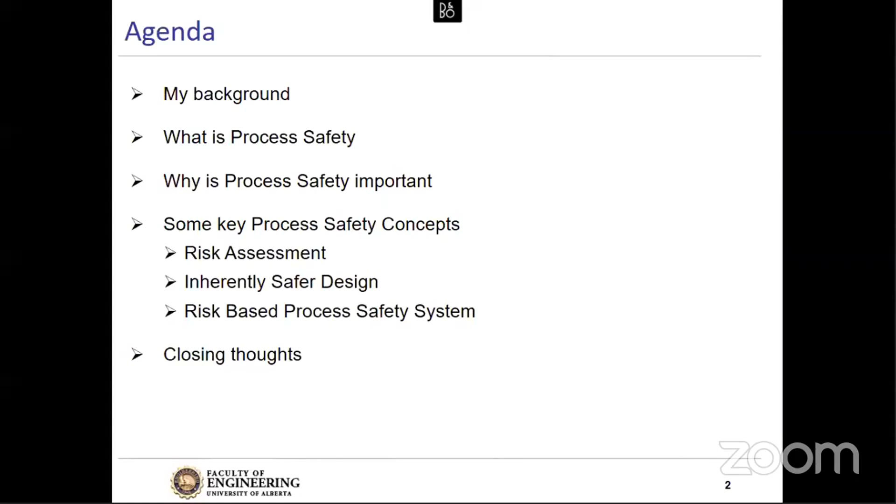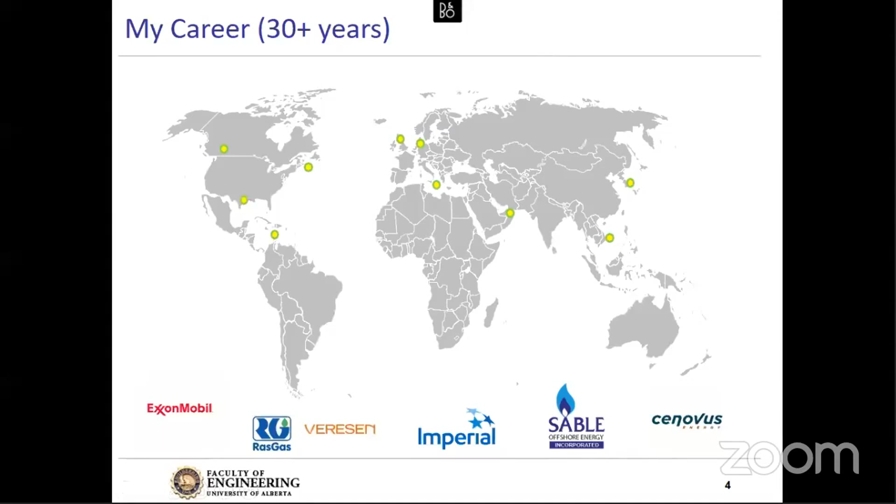When I look back at my career, I'll share with you some highlights over 30 years of places around the world, as shown by some of these yellow dots, that I had the very good fortune of working with through some of the companies that are listed down here.

When I look at my career, this slide here is a little bit busy, but I will take a few minutes to walk you through it, because it's very important to understand that when you're sitting there as an engineer getting ready to graduate in your senior year, you think you will have a very set path in your career. And I'm very confident that there will be many opportunities that come across to you that will take you in different directions and some very interesting areas.

And when you look back, hopefully after 30 years like I do, you realize I was very fortunate to work with some great organizations and meet some wonderful people along the way.

So if I look on the left-hand side over here, I started my career with the company Mobil Canada here in Western Canada. I worked for several years, and I had a degree in petroleum engineering. Then I went back to graduate school in '92, '93, and I went into environmental engineering in a master's. I did some environmental engineering work in British Columbia, a province next door to us on the Pacific.

Then I rejoined Mobil Oil, and I had a number of assignments with them working out of Calgary. And then from there, I went to a project off Eastern Canada, Sable Offshore Energy. This is a picture of it. I'll share some more thoughts on that.

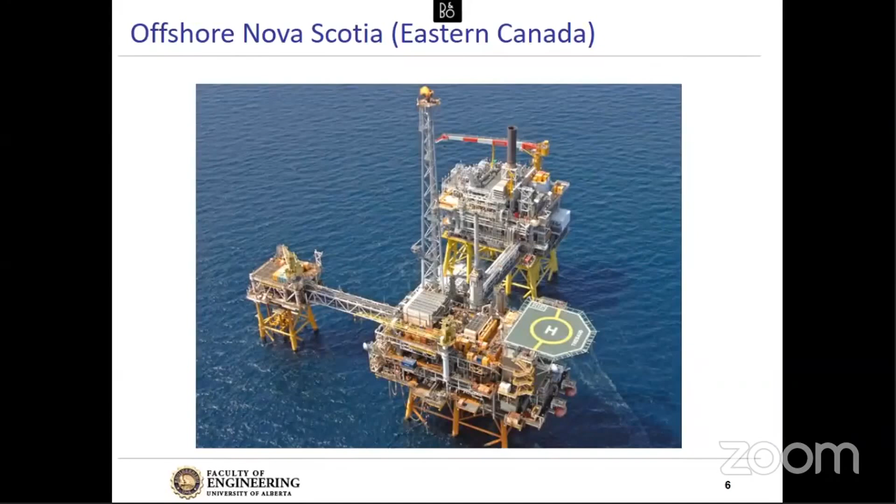A couple things I would mention here is that this is a great looking day offshore. You don't see much whiteness in the ocean. And it's a very compact environment. So as you can tell here, the way these platforms are built, you build upwards. And these platforms bring a lot of risk due to their small size, their remote location, and the large volume of hydrocarbons that go through these platforms every day. So very interesting for risk management.

I mentioned I worked in the state of Qatar on liquefied natural gas, or LNG. This was a project where we had some 30,000 people building our plants, and we were expanding quite rapidly to develop LNG to supply the Far East, Korea, Japan, and China. At the time, we had a footprint of 1.6 kilometers by 1 kilometer. We ended up building that whole part of land in terms of the size of our plant. It was a massive, massive project.

I had the good fortune of working with people from 52 different nationalities. Just a wonderful experience. And also a lot of risk as well. Taking natural gas and chilling it and making it cold to get it ready for shipment is very interesting, but also has significant process safety risk.

When I came back to Canada, I was involved in oil sands mining for several years, some major projects, which are large strip mines in northern Alberta, which have oil sand or thick mixture of almost like molasses and soil particles, and quite an engineering feat to be able to mine that bitumen, as it's called, and make that into a product that's usable.

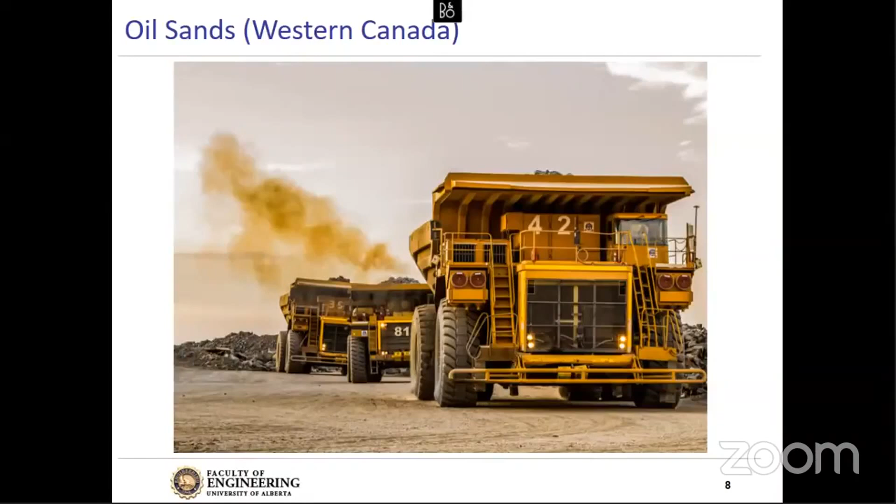Also in Western Canada, when we have too much overburden or soil layer.

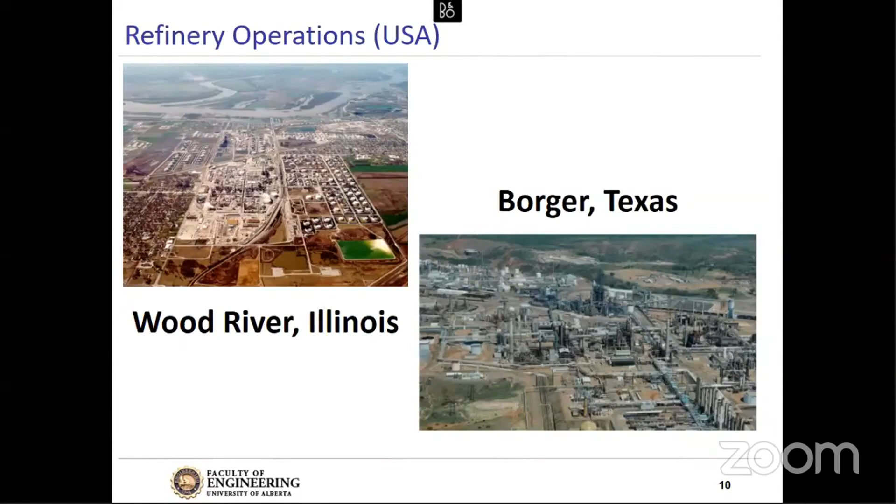And then next door to us in British Columbia, where we have a lot of rain at times of the year, we have, you can see here in black, this is what's called a run-of-river facility. It's like a dam that you inflate when you have high water volumes and you want to divert that water through a turbine, which would be in here, to create electricity. But it only works well when you have a lot of water discharging through rivers. Very interesting work as well.

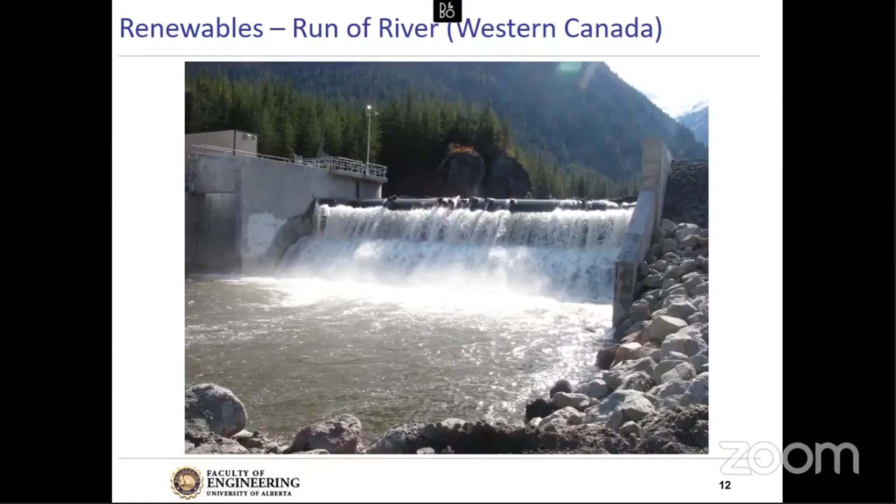So that was just an overview of some of the places and people I had the good fortune of working with over the years.

Let's talk about safety concerns and types of losses. When we think of safety, there are two broad types. The first, which most of us think about, is personal or occupational safety in terms of preventing injuries to people, like when you slip at work, cut your hand, or fall off a ladder. The second type is technical safety, which is preventing some unintended release of a form of energy. Process safety is a subset of technical safety.

Looking further at both categories in terms of type of loss incidents: personal safety tends to involve a worker, with examples like a slip, cut, or fall. It's usually due to something in the workplace, what we call a substandard practice or condition. When we look at the injuries, it's typically one, maybe two or three people.

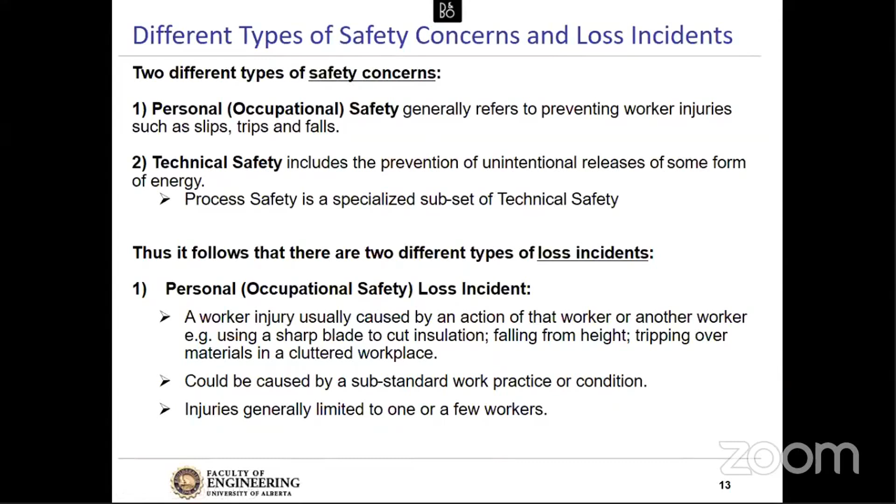We consider technical safety as really losing containment. Something that has energy is usually contained or maintained, and we've lost that, resulting in an unintentional release. Often it's a chemical or something hazardous, but it can also be a form of energy. What's interesting with technical incidents is that the likelihood of them happening is very low, but when they do happen, the consequences can be catastrophic. The injuries can involve many people, a significant impact on the environment, loss of an operation or asset, negative publicity in newspapers and television, and your business may never recover.

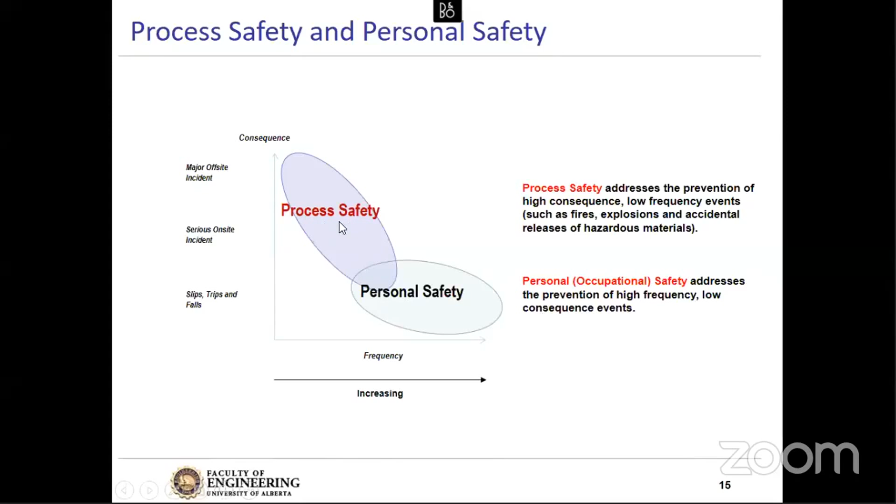Some key differences as noted here: they're not the same, as I explained. If we look at personal versus process safety, personal safety tends to be very focused on work interactions, rules and equipment, and training of people, so there's a lot of individual control over prevention. Process safety is much broader, a more systematic approach, with typically little control at the individual level. Examples we've talked about are falls, slips, maybe electrocution, some minor injuries. Here, the incidents are explosions, fires, and releases, which are much more significant. The safeguards for personal safety are things like work permits, PPE—if you think of coronavirus, a mask is PPE—guardrails, that sort of thing. For process safety, the safeguards include both design, which is a big part of our job as engineers, and also ongoing operations.

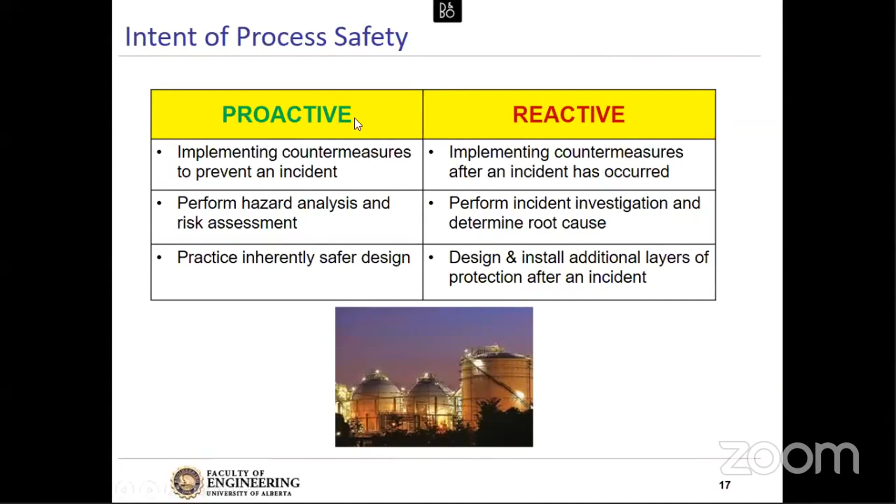When we think further about process safety, it is meant to be both proactive and reactive. When we think of being proactive, what are the countermeasures we put in place to prevent something bad from happening? We perform hazard analysis and risk assessments, and we practice this concept of inherently safer design, which we'll talk about. On the reactive side, we also have to have countermeasures after something bad has happened to try to minimize further consequences. We take a deep dive on our incidents to truly understand why they happened, and we look at designing and installing layers of protection for after an incident. So you have to be looking at process safety through both a proactive and reactive lens.

So when we think back on process safety, a defining event happened over 35 years ago in the United Kingdom at Flixborough. There was a major explosion, and it involved cyclohexane, a very tragic incident that was preventable, but it had major losses.

After this incident, process safety got a lot more attention and focus in terms of industry, training, and regulations. That was 35 years ago. Let's think of BP Texas City, that some of you may have heard about. This happened just about 15 years ago, and this is an image from this incident, a tragic incident. So these incidents still continue to happen involving process safety, which is very terrible.

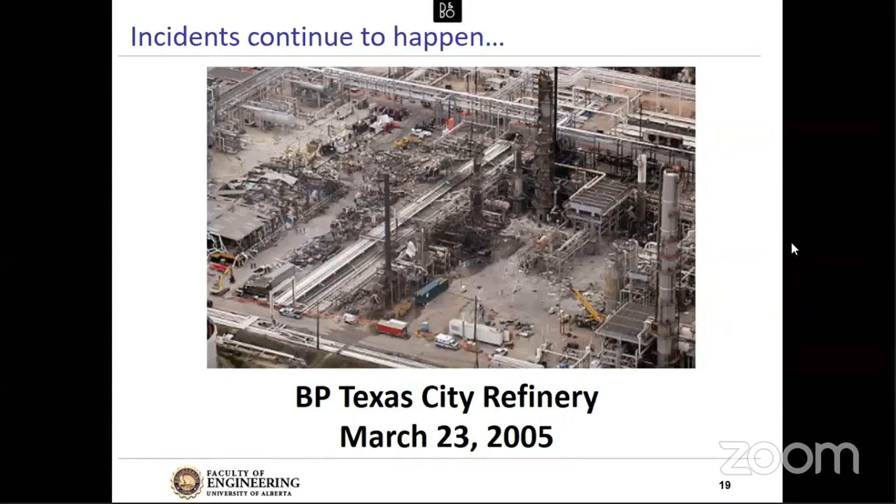So we say to ourselves, why are we not learning from these types of incidents? Why do they still occur? Why aren't things improving? Some things for us to consider, some questions.

Do you think sometimes that organizations spend way too much time on preventing slips, trips, and falls, but maybe not enough time thinking about those process safety type of situations? Do you have the right personnel, particularly your operations and maintenance personnel, involved in making decisions? They are experts in your business.

Another question, are you paying attention to what I call signals or indicators of something not being right and being proactive and using that information? This one, the second last one, is a real big item. Sometimes you'll hear people say, it doesn't happen at our site, it only happens at other places, right? Are we sharing and learning the lessons of others?

Or if you're at work, what does your senior leadership talk about the most? Are they talking about profits? Are they talking about layoffs and cuts and reductions? Are they talking about efficiency? And when they're talking about safety, are they talking about process safety in addition to personal or occupational safety? So let's explore this a little further.

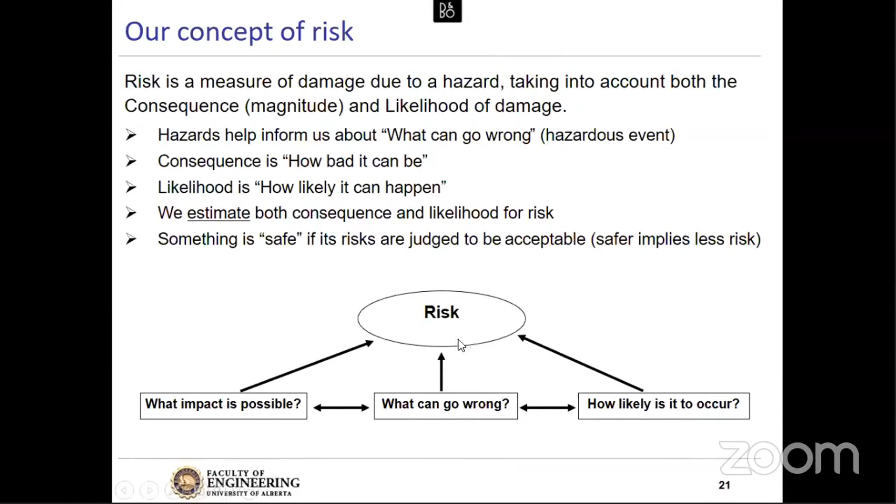We use both consequence and likelihood to estimate risk. So unlike other things we calculate in engineering, risk is more of an estimate. And we say to ourselves, if the risk is acceptable, something is safe. So this diagram at the bottom captures these concepts in terms of what can go wrong, how likely it will occur, and what impact it could be. These areas inform our understanding of risk.

When we think of risk criteria, as I mentioned, process safety events have much more significant potential consequences, but their likelihood is very low. And we have to understand that everything we do, every activity, even things outside of work—driving a car, walking down the street and talking on a cell phone, skateboarding—all have a level of risk with those activities. And it's never entirely eliminated, and we end up with what we call a residual level of risk.

Companies and organizations put in place criteria for the risk with their activities, and they use these criteria to establish a risk matrix, which we'll talk about in a moment. A key thing is that when we believe we have an acceptable level of risk, that is the maximum amount of risk that we can accept. And if something bad happens, we can live with it.

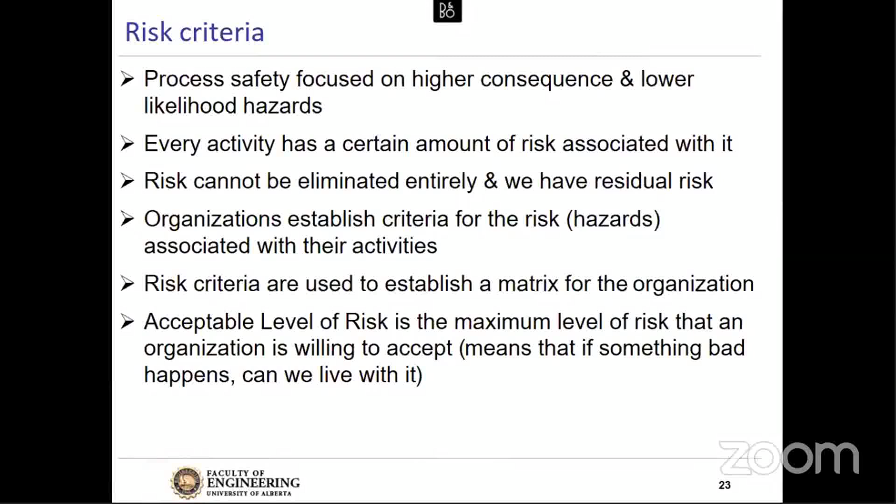So for us, when we think of process safety, we come back to fundamental questions. What are the hazards associated with our activities? How do we evaluate the hazards? What can go wrong and how?

Then we think of risk analysis with several questions. How bad can it be? How often can it happen? And when we know consequence and likelihood, we're able to estimate the risk as a combination of them. And then, how do we control and manage this?

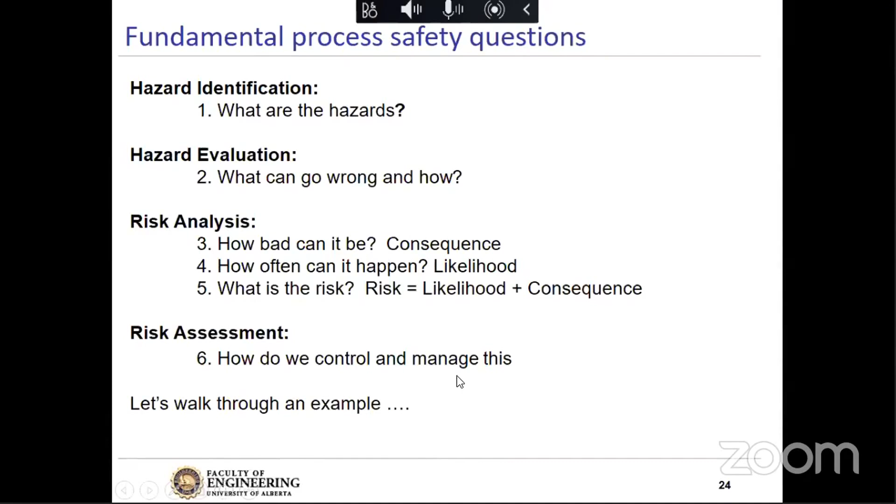So let's talk about an example that we're all familiar with. Imagine you're going to a service station to fill up your vehicle. And when we look at this through risk, how do we approach this situation? What questions should we ask to fill our gas tank safely? I'm sure many of you have done this many times and probably do it in a way that you're not even thinking of the risk.

So when we think of our questions, those fundamental questions of gassing up a vehicle: the hazards, what can go wrong and how bad can it be, how often can it happen, what is the risk, and how can it be controlled and managed.

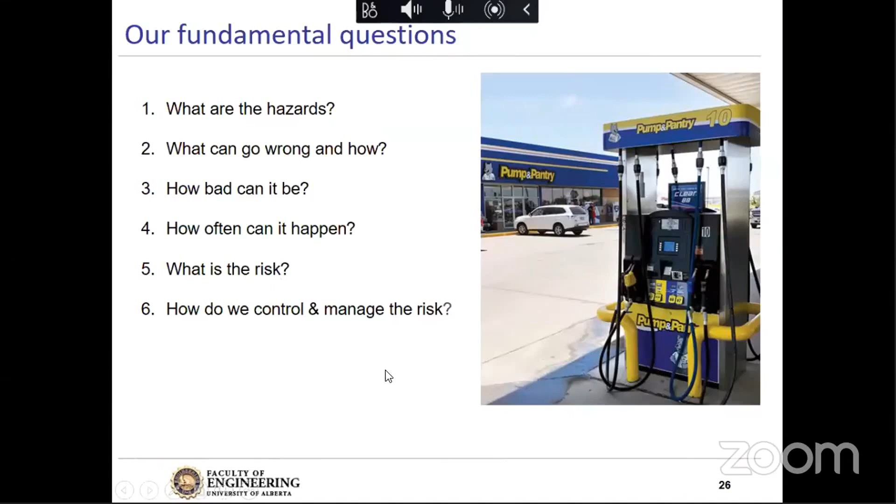For us, when we think of chemical plants, there are three main sources. The chemicals themselves, the properties, just like gasoline - is it toxic? Is it flammable? Will it react with other things? The equipment we're using, because we're worried about containment, so could we have potential leaks, equipment failing to operate outside of limits for operation, so several questions. And our procedures, how we start and stop if it's not correct. What if we have an emergency? What if we start the wrong equipment?

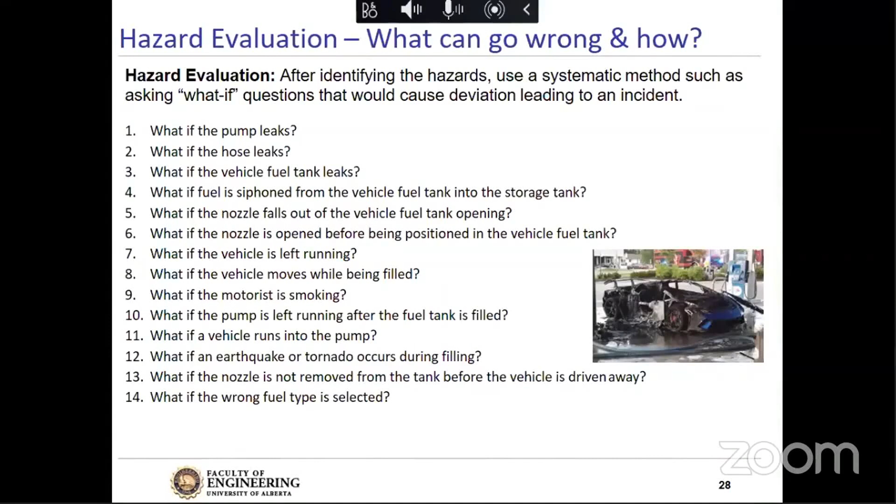How often can it happen? We look at the likelihood in terms of the expected probability or frequency of what we call an initiating event, which is the first event leading to an incident. For us, we often use frequency. Here's an example of someone says a pump could fail once in 10 years. That would translate into a frequency of 0.1 failures per year.

And here is the example of our frequency portion of our risk matrix. Improbable, practically impossible, to very frequent up here, likely to occur repeatedly.

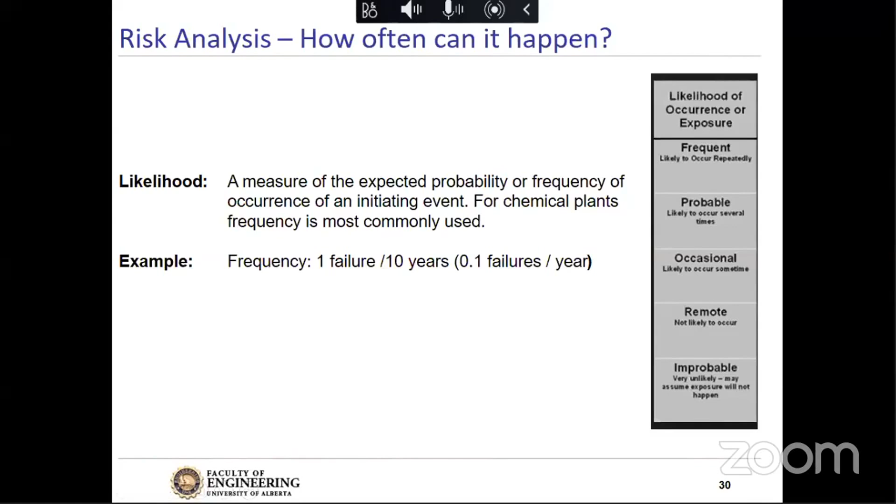So after we've assessed the risk, how do we control and manage it? Here is a model that's used frequently, called the Swiss cheese model. Some important things on this model: just like slices of Swiss cheese, which are depicted here, there are holes in the Swiss cheese.

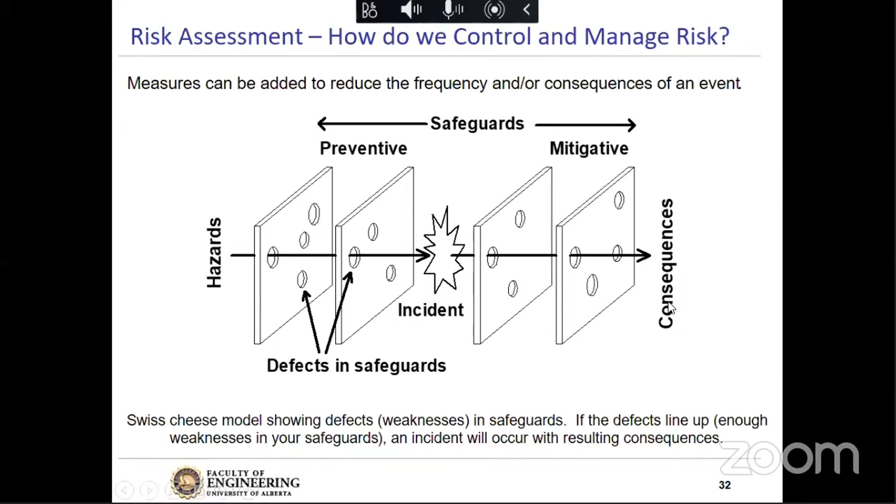Let's go back to our gasoline station. What are some of the safeguards? Maybe it has full service, so you don't have to leave your vehicle. There's somebody that's trained and competent in gassing up your vehicle.

Maybe there's barriers in front of the gas pumps in case the vehicle loses control, which helps you from hitting that gas pump. You have a fire suppression system, typically with foam. You've probably seen emergency stop buttons, both at the pump and remote at the attendant's desk.

Warning signs and instructions. So this is a list of many safeguards that are present at gasoline stations, some of them that we don't even think about when we're there, to help reduce the level of risk to an acceptable level for filling our vehicles with gasoline.

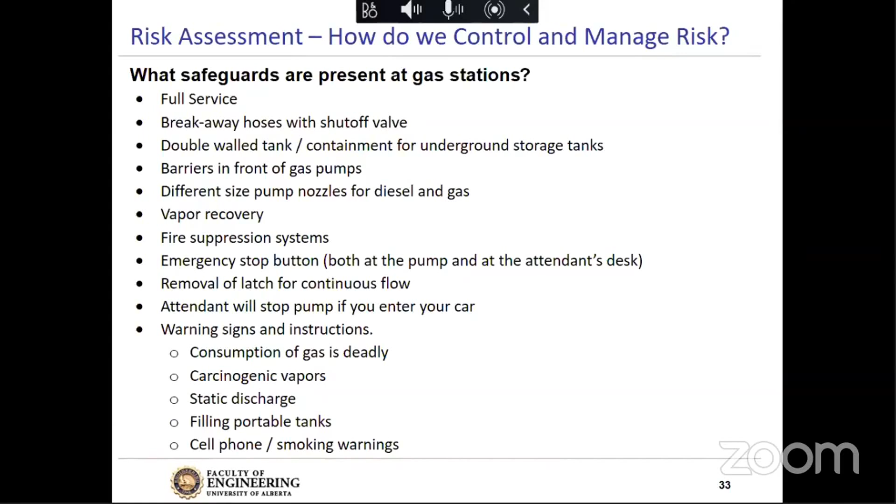So we've talked about a simple example, common, that we've all seen. Let's reflect on a key concept called inherently safer design. It basically means it's an engineering approach or a mindset to have safety built in or risk built out. It came out of the chemical industry in the 1980s in particular.

The Center for Chemical Process Safety provides us with this definition: it's a way of thinking about the design of chemical processes and plants that focuses on the elimination or reduction of hazards rather than on their management and control.

For us, inherently safer design happens very early when we look at building a facility. That is much more effective than trying to incorporate this concept after a facility has been built. Unfortunately, this is not always the case. As engineers, we're trained to be designers, but often we think bigger is better.

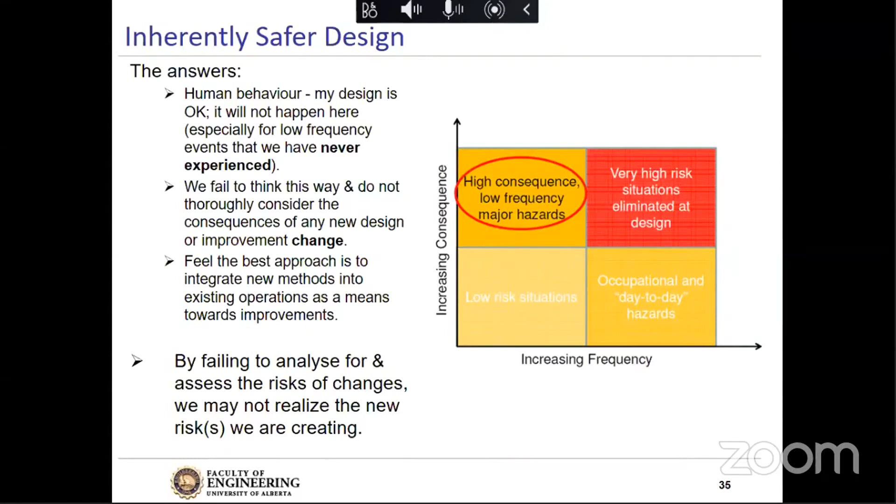So when we think of inherently safer design, there are four main strategies that approach this mindset of inherently safer, and I'll talk about each of these with an example here in a moment. From an introduction, the first one is to eliminate or minimize. This means to use small quantities, particularly of hazardous materials or energy sources, or to reduce the equipment in terms of temperature and pressure.

A great example is, we recall this earlier this year, there was a terrible explosion in Beirut that involved ammonium nitrate. A very large volume of ammonium nitrate was stored in the port of Beirut, which led to an explosion. If that volume was much smaller, the incident, while it may still have occurred, would have had a much less severe impact.

The second one is to substitute or replace a hazardous chemical or material with something less hazardous. The third area is to moderate, to reduce the hazards by maybe diluting or using a refrigeration type of process. And the fourth one is simplify, particularly in areas where you want to reduce the risk of human error.

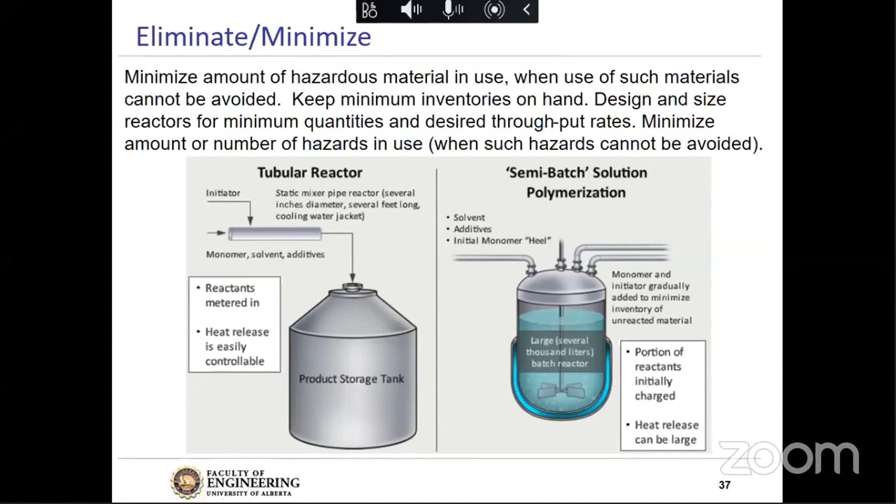One that we're very familiar with when it comes to substitution is paint. Many years ago, a solvent-based paint was very common for a number of reasons. Now we use much more water-based paint. Much better for the environment, for our health in terms of toxicity, lower odor, and also for fires. So a common example that we see is with paint.

Moderating, I mentioned trying to use equipment at less severe conditions, particularly temperature and pressure, or use hazardous materials in a least hazardous form.

This example here shows us an ammonia concentration modeling going from 0 to 20,000 parts per million, and a reaction distance for a leak, for a failure. This is from some consequence modeling for a small hole release, 5 centimeters, and the difference between using anhydrous ammonia and 28% aqueous ammonia. So we've moderated the type of ammonia here, and you can see, if you look at 10,000 parts per million as an example, if you had a release, the impact distance is much different between the aqueous ammonia and the anhydrous ammonia.

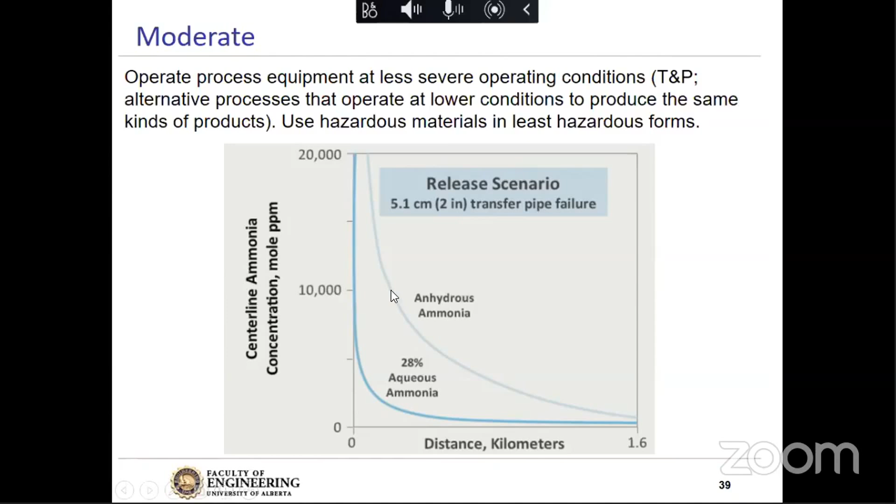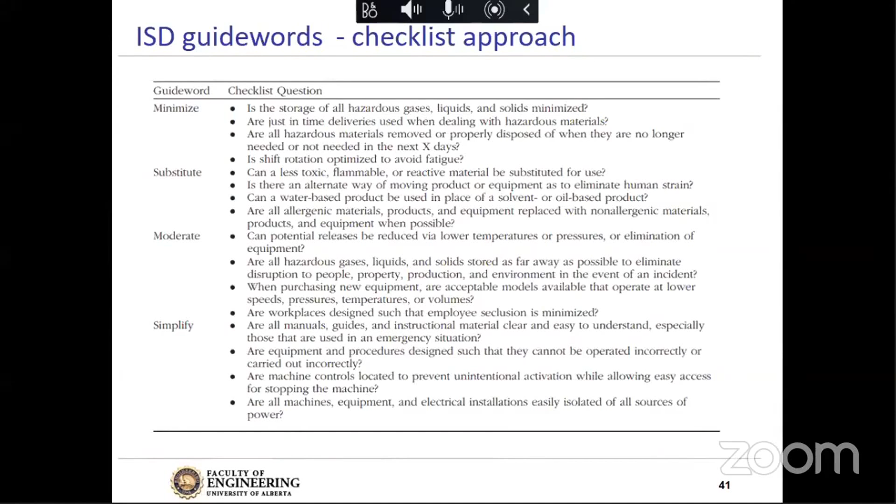So this brings us to the topic of risk-based process safety. And what we mean by this is that organizations have moved towards a very holistic, systematic approach to maintain their integrity of what they operate. And process safety is very much about being proactive and involving these principles, which I'll explain through a model here shortly.

A key thing for us is that the residual level of risk is never zero. You never get risk to zero. You get it to a level that's acceptable, as I mentioned.

So when we talk about a risk-based process safety framework, there are 3 things to consider. The first thing is this idea of what people call a management system. And what we mean by a management system is where you structure and document all your practices, procedures related to, in our case, process safety management.

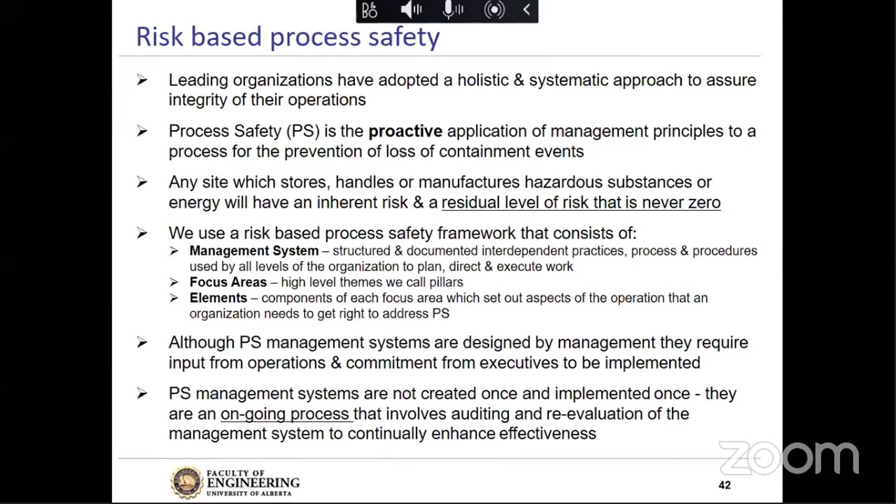So these 4 pillars become your foundation. And then we have these elements that are associated with each of the pillars. I'll spend some time talking through each of these to help give you a better idea of what they mean.

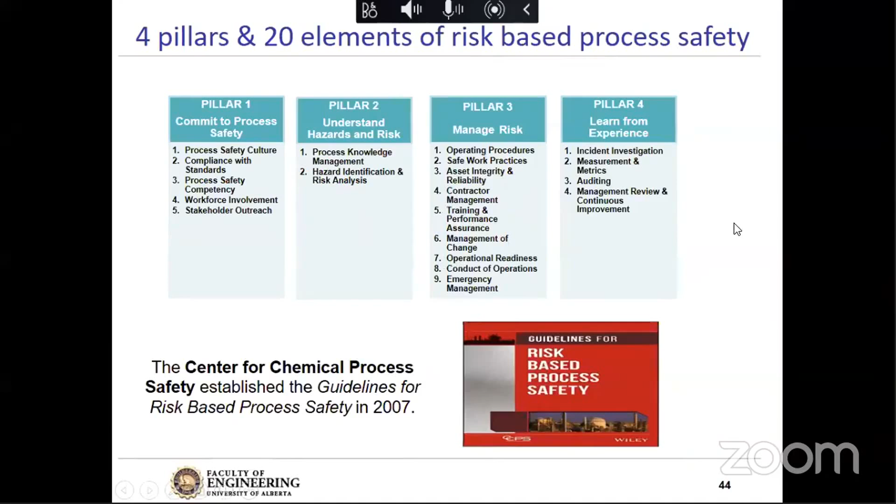So let's talk about pillar 1 first. Commit to process safety. Element 1 is titled Process Safety Culture.

What do we mean by this thing called culture? It's how we do things around here, what we expect, or how we behave when no one is watching. Why do we have this? Because when we've looked at terrible incidents, there has been a weakness in the culture of the organization.

And some key features to make sure you have a good safety culture are to particularly maintain a sense of vulnerability. Very important to make sure you're not overly confident, that you feel vulnerable. Making sure people are empowered. Use your expertise. Make sure there's open and effective communications. An environment of trust.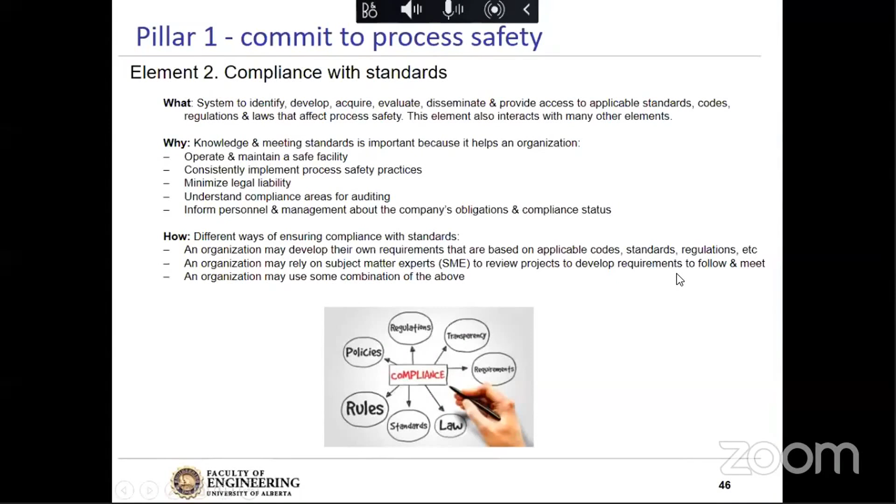Our next element, number 3, under commit to process safety, is process safety competence. What we mean here is a combination of process safety knowledge, understanding, and experience within the organization. It's important because it's harder to measure than other areas, and we often have requirements in place for career advancement. We have to make sure people are continuously improving their knowledge and competency, as you will experience through your career, and making sure the correct information is provided and applied consistently. So competency is a very important element.

Element number 4 under pillar 1 in terms of commitment is workforce involvement. It means, how do we involve all our workers, particularly contractors? I mentioned to you the incident at Texas City, during a turnaround at the BP refinery. A large number of contractors were unfortunately killed in that incident. So we had to make sure all people on our work sites are involved in making decisions. It's important because those people who operate and maintain our facilities are usually most potentially exposed to the hazards of our operations, and they're usually the most knowledgeable about what's happening every day. There's really no set of rules for how we do this, but it's important to make sure people actively participate.

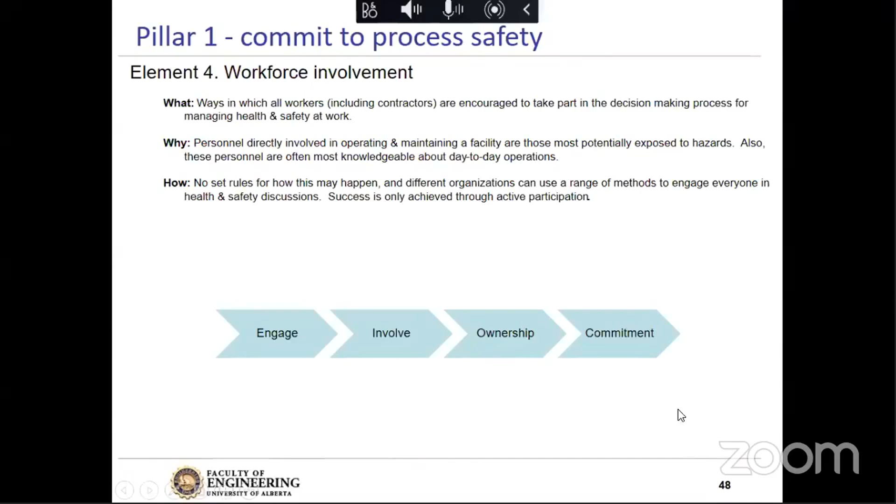Element 5 under pillar 1 is stakeholder outreach. This is a big topic today, particularly for us as engineers, understanding stakeholders and society's expectations of us to develop projects that are acceptable to the public. So for us, there are 3 key things.

Who are those individuals and groups that can be affected by our operation? Then we establish relationships with those groups, other companies, and inform people about what we do. There was a time in our business of chemical plants where you really didn't tell a lot of what went on in your organization to the public, and that has very much changed in terms of people's expectations.

This involves what I would call a coordinated approach by technical people such as ourselves, engineers, but also experts in communications and experts in legal requirements. Here's an example from Scottish Power: they call it their 5 golden rules of engagement. First, take the initiative to get to know your stakeholders. Then they say, listen—no, really listen. They go on to describe the other 3. Very important, not something taught as much traditionally in engineering, but stakeholder outreach will certainly be part of some of your jobs as you advance in your careers, I expect.

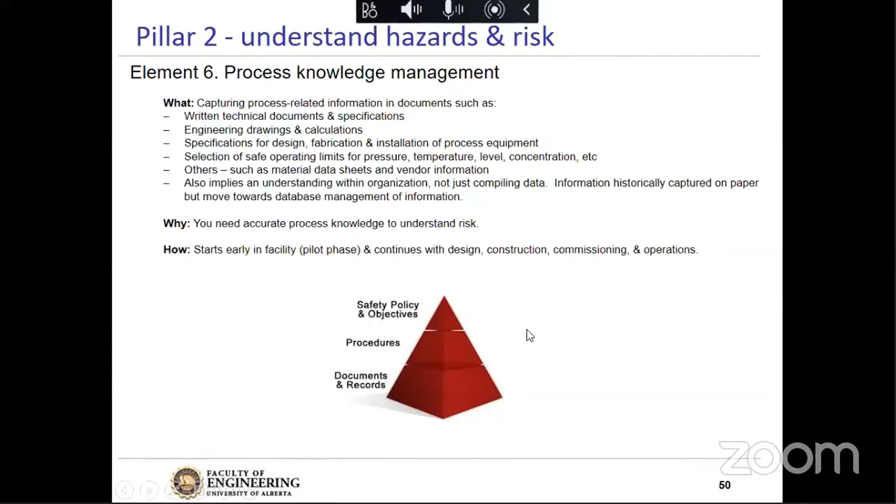Element number 7, hazard identification and risk analysis, sometimes called HIRA, is part of pillar 2. HIRA is a collective term that encompasses all activities involved with identifying hazards and risk evaluation to make sure the residual level of risk is acceptable. Some other words you may hear that mean the same thing are process hazards analysis, process hazards review, process safety review, etc.

So we do this to manage risk, but we first need to understand our hazards and then assess the risk. This comes back to the 3 questions we thought about with our example of putting gasoline into our vehicle: What can go wrong? How bad could it be? How often might it happen?

There's a number of tools we use for this. Some of you may have heard of hazard and operability study, or HAZOP. We mentioned the simple what-if, failure modes and effects analysis, and also layer of protection analysis. These are very technical, very much engineering.

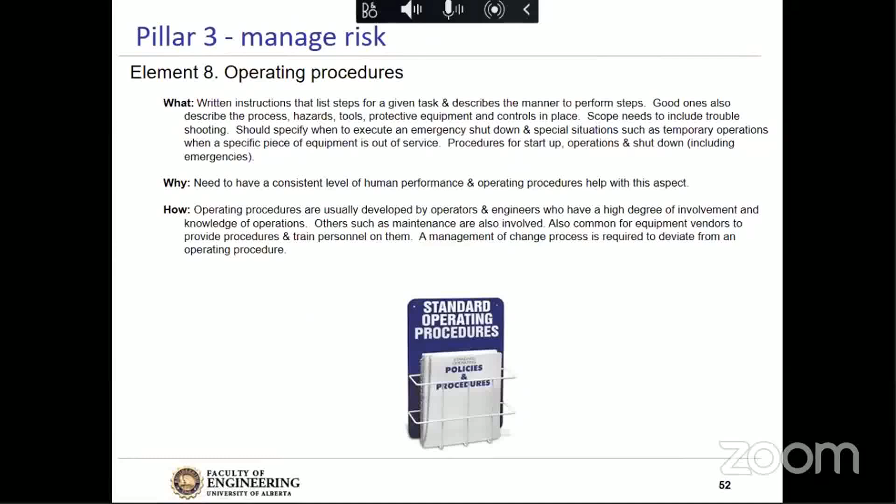Element number 9, safe work practices. Many of us are probably familiar with these if you've worked. This is the processes that we've put in place to help manage work. Some examples are lockout/tagout, hot work, line break, confined space entry.

Often our safe work practices are required by some sort of government regulation. And again, just like our operating procedures, we need to have consistency.

What's interesting is that safe work practices is one area where both process safety and occupational or personal safety overlap. If you recall the diagram we showed, the two bubbles overlap in one place, and this is an example of where that happens.

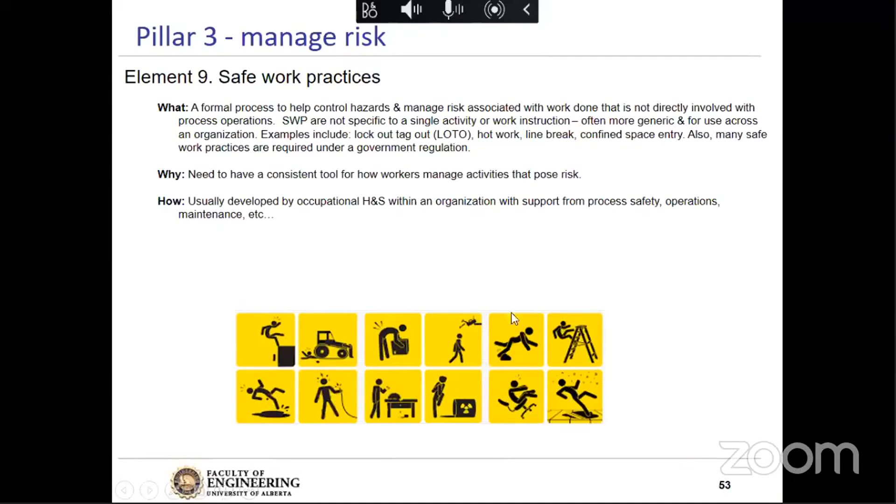Here are some common pictures of different safe work practices, reminders that you may see in the workplace - things from making sure you're using your office chair correctly, slips, trips, falls in terms of keeping a tidy workplace, making sure you're using your back correctly if you're lifting, and if you have things stored at height, that they're secured, etc. Many of us typically think of these because they're much more frequent or common.

Element number 10 under pillar 3 is asset integrity and reliability. What does this mean? We design equipment and we install it, and we need to make sure it's maintained fit for use until ultimately it's retired from service.

Good asset integrity and reliability involves inspecting equipment, testing it, preventative maintenance, and even predictive maintenance, repairs, and a good quality management program - making sure that our systems, particularly for us in process safety, key systems such as pressure relief devices, will work when needed.

It involves a team in terms of how we do it, including operators, maintenance, inspectors, and engineers, sometimes specialized engineers that are experts in, say, rotating equipment as an example. And in many places, regulations require a program for asset integrity and reliability.

Element number 11, contractor management. I mentioned before it's very important that we have our contractors engaged. Many workplaces in the chemical, petrochemical business involve contractors to help our regular employees, especially during maintenance outages. We hire contract organizations.

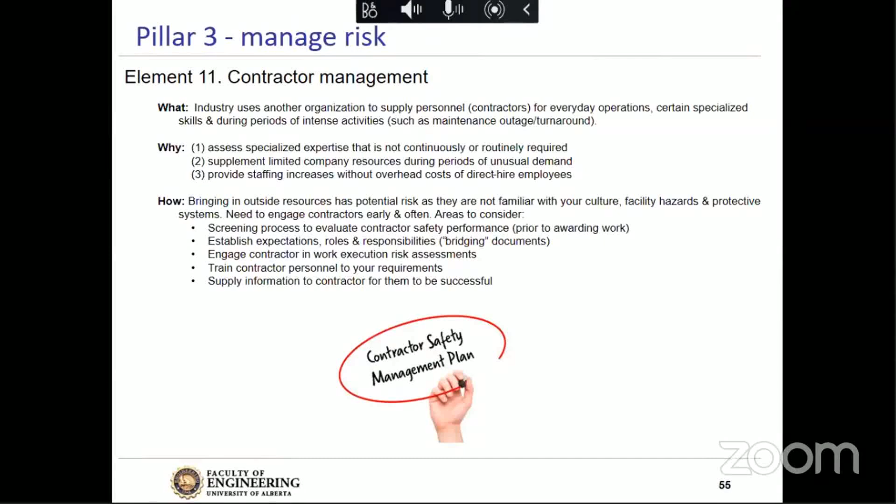Element number 12: training, performance, and assurance. For us, we look at training as practical instruction. Assurance helps us confirm how people understand their training and can apply it. A great example is getting a driving license for a vehicle. Typically you have a written test to make sure you understand the rules and regulations, and then you take a road test where you demonstrate you're able to drive. That's kind of a performance and assurance process.

It's very important for obvious reasons. We need competent, qualified workers at all levels, from entry level, to when you start your career as an engineer in training, to when you're maybe a senior engineer that's a subject matter expert. It's very important because people are such a big part of decision-making in organizations.

How it's done: it can be done in the classroom, but also a lot of it's done on the job, usually with a mentor or a coach. And it's usually done independently to make sure that you are qualified before you advance. It's very important for both your success and the organization's.

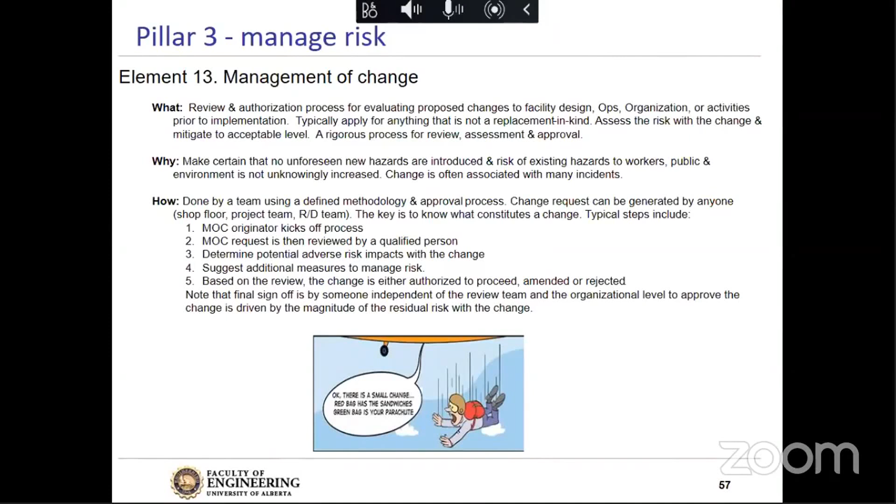Element number 14 of manage risk is operational readiness. It's really a check or verification that procedures or something that's modified are safe to start up. Sometimes you may hear this term: a pre-start safety review, PSSR. That's commonly used, and we do this because incidents or loss of containment happen more often during periods of startup - these transition periods. We use this for all types of shutdowns, maintenance, repairs, replacements. Sometimes it can be very simple, one person doing a walkthrough with a checklist, or in some cases I've seen an activity that's lasted over a week with a very large team, reviewing not just what they see, but the physical records as well. So very important.

Element number 15 is the conduct of operations to manage risk. What it means is how are you putting in place your process safety culture every day? There's a saying we have in English: plan the work and work the plan, which is one way of thinking about it.

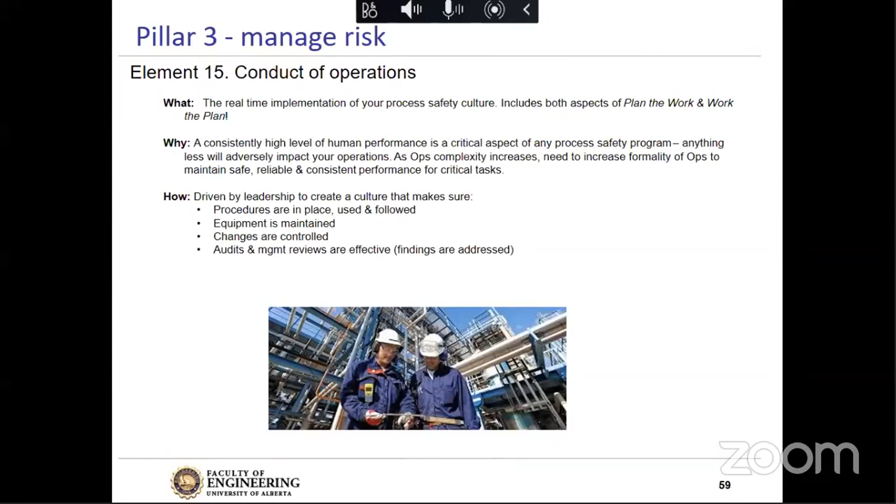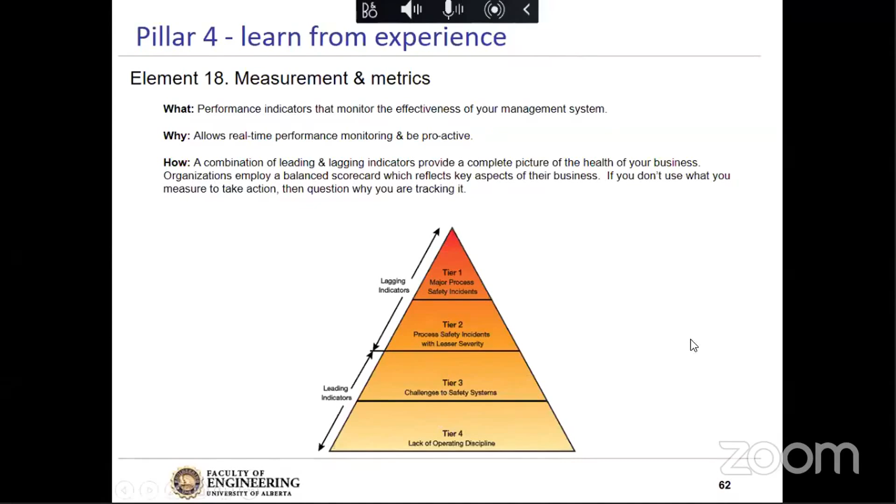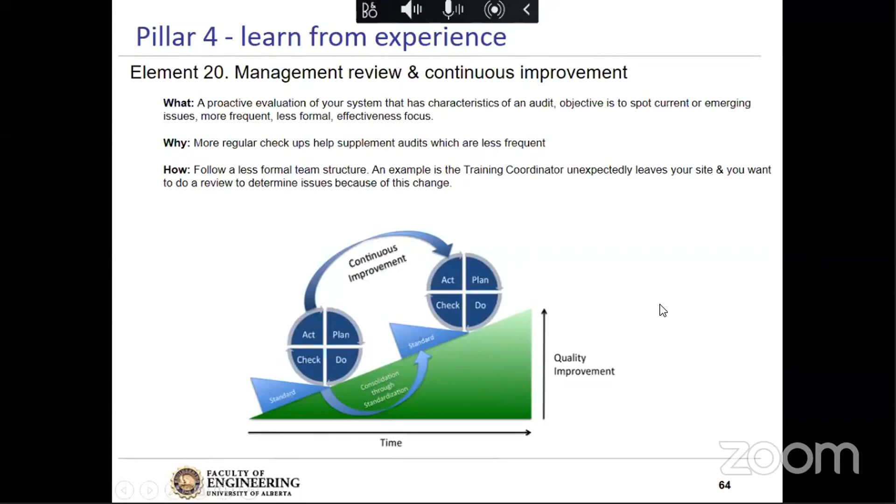That brings me to the end of the elements. Now I'd like to wrap up with some closing thoughts. Here we have Janus, who is named after this mythical figure looking back as an older person, but also as a younger person looking to the future. What do I think in terms of your careers?

You're at a very interesting time in history. The change our world is experiencing, and will continue to experience after COVID, is ahead of us. We're in the middle of an energy transition, and we will need your skills as technical engineers to be part of that.

The second thing I'd like to share is that you may not know it, but all of you are going to be risk managers through your careers, and you will need to make risk-based, informed decisions.

The third item: when I think back on my career, I sometimes had opportunities available that seemed significant, maybe overbearing, maybe beyond my reach. I felt you needed courage to adapt and grasp those opportunities, but also beware of situations of what I call destructive testing—being pushed too far beyond your capability. That's probably not good for you on many levels, not just your results, but also your mental health. So be aware of that.

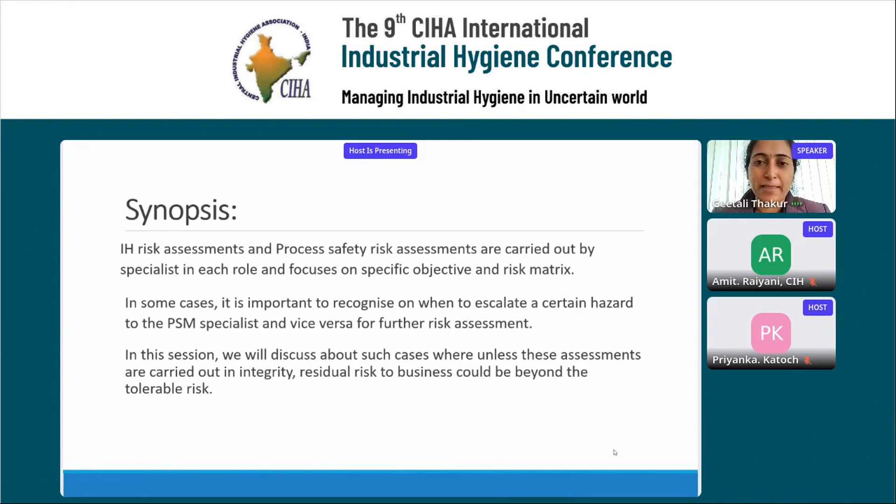This is a mandatory disclaimer from Cipla that I have to give - these are all my opinions and not to be quoted from Cipla anyway. You can move to the next slide.

Process safety, in a simple definition, is about letting the process material remain in the pipe, where it has to be - that's the purpose process safety achieves. Both of these, as EHS functions, I always tell my team: you are the person between a worker on the shop floor and his family. You take a lot of decisions through risk assessment about how that person should do a certain job, deciding what is a tolerable risk. Both industrial hygiene and process safety bring us to the point of having safe operations, ensuring the person on the shop floor is safe - one inclined towards health, the other towards safety.

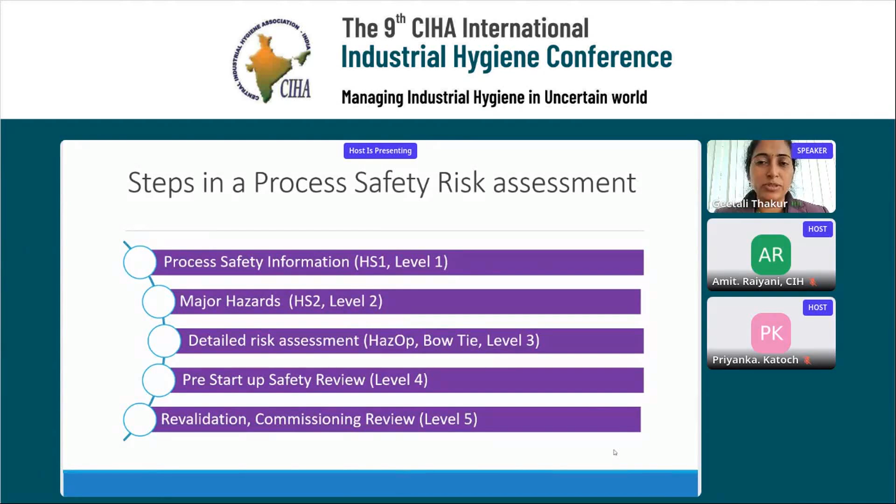In terms of industrial hygiene risk assessment - and the reason we're looking at these two slides is to see what's common and what's different between the two, and then look at some case studies about when to ring the bell of process safety, or ring both bells.

We have a slide on that, more into details.

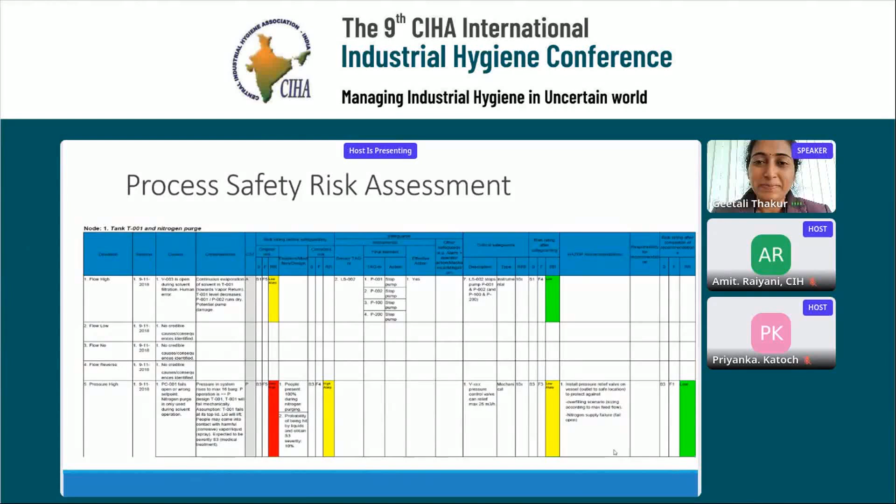In majority of our case with exposure, in terms of industrial hygiene, I'm not getting into physical hazards, biological hazards, heat stress, or even psychosocial factors, though those have a lot of link to chemicals too. I'm really trying to keep this to chemical exposure assessment, because process safety is about keeping the process material in the pipe, so it's really something surrounding chemicals. That's how I'm trying to take the chemical exposure assessments and process safety together.

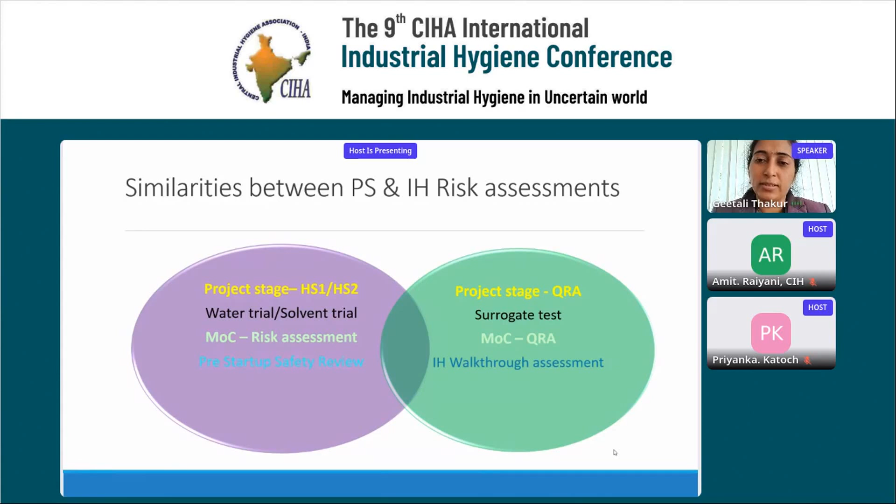We could move to the next slide. So that was all about the similarities.

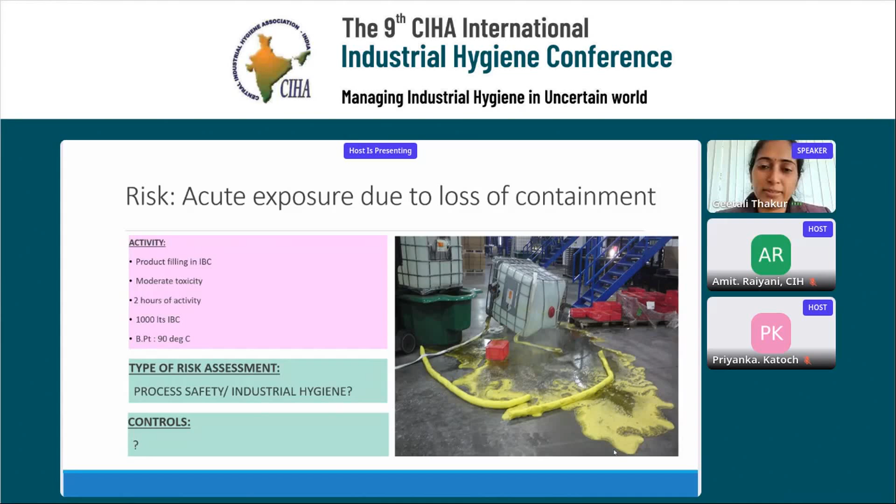Okay, can we move next to the next slide? Yeah, so right, okay just back. Yeah, so as I said, the industrial hygiene risk assessment would anyways take it too high, and we wouldn't be able to conclude for loss of containment scenarios with an industrial hygiene kind of risk assessment tool.

Okay, we move next to the next slide. I hope you all are liking these case studies. As I said, I wanted to keep the participants engaged with these case studies. Thank you.

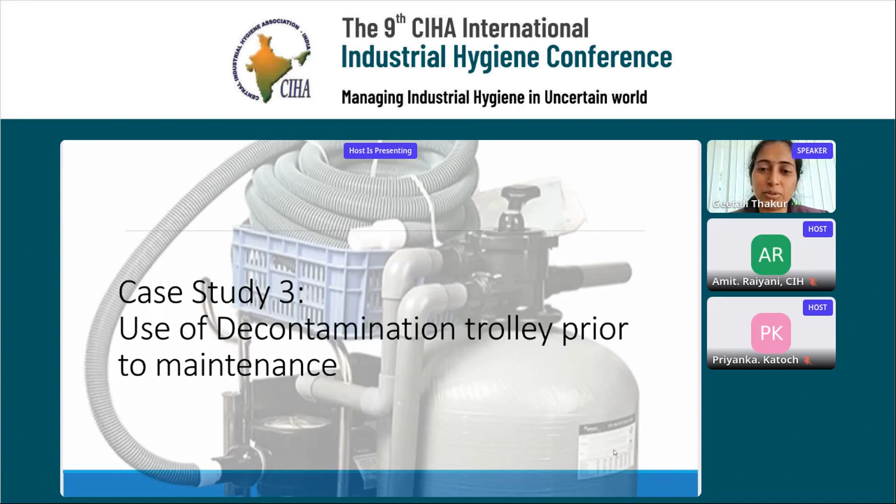Right, so the third case study is of use of a decontamination trolley prior to maintenance. Let's move to the next slide.

So let's imagine that a pump has to be taken out for maintenance. What we would try to do is that particular pump will be flushed with solvent. We would blind the suction and discharge lines, which are otherwise going to the other vessel or reactors. And we would decontaminate it using this particular trolley. There is a small pot there, and then there's a hose. The hose will be connected, one end to the pump, and the other point would be connected through this particular pot. Now, in this kind of case, what type of risk assessment would you really look at?

And it can be used for any kind of chemical. I'm just trying to give you an approach on how we handle the ambiguity when it comes to these kinds of assessments, where this decontamination trolley is used for any kind of chemical. Anybody wants to take it? What type of risk assessment would we really go ahead with for this activity?

Good, Ayash, very good, Avni. Anybody else? Ayash, very good, Hitar. So we would do the IH assessment, and we would also do the process safety assessment. Perfectly captured that an IH assessment is required. We don't have audio, otherwise I would have asked why you said IH.

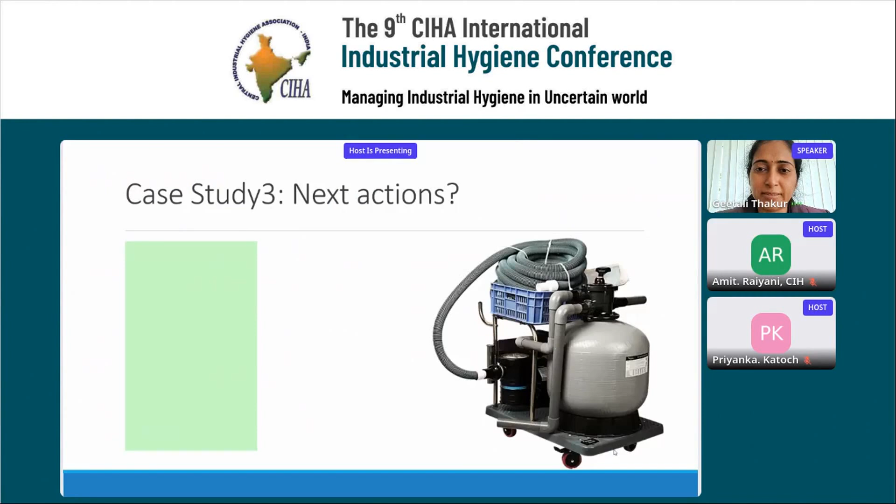So this is what I wanted to include - that it's not just only about decontaminating it, but also to look at it, because we are going to also use a solvent which has lower vapor pressure. We are going to be using these toxic chemicals.

So this is my favorite gadget actually, the ppbRAE, or you would call it a VOC meter. So when we are doing this particular activity, we really try to see from which hose, or which particular joint the emissions are coming out. So you don't need to do a workplace exposure monitoring quantitatively by calling some third party.

But for such kind of activities, where it can be any chemical that is taken up, you plan the activity in such a manner that we do this for the chemicals which have lower vapor pressure, and then assess using this particular VOC meter, really trying to look at where the emissions are from these particular joints during the decontamination or the pot emptying out, and based on that can be the further actions.

So in this particular case, the IH assessment has happened, and going further, it's also about the workplace exposure monitoring using one of the simplest gadgets. Can we move to the next one?

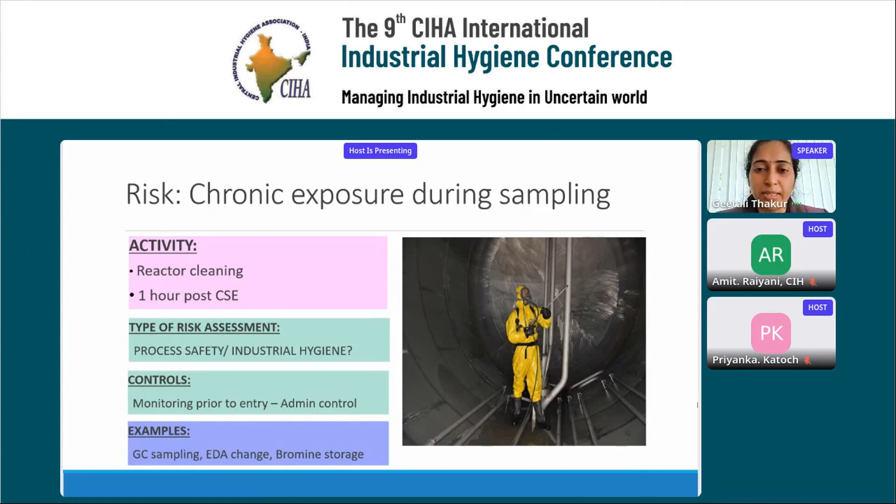Right, so in this case, again, it would be really the highest risk, and here it would be tolerable. Let's go to the next slide.

Right, so this is the last case study. And in this particular case study, we are looking at fugitive emissions of CMR chemicals. Next slide, please.

So you can see that we have got different flanges, instruments, pipes and fittings, and there are CMR chemicals which are used in that particular plant. We have got an HVAC system, so everything is closed. So in such a case where there is chronic exposure while working in the plant due to fugitive emissions, what is the kind of risk assessment?

I just really love this person who's written, Avni. Thank you, yeah, perfect, good. Great, so both process safety and IH is saying. Okay Avni, what is the IH assessment that you will do for fugitive emissions?

Yeah, so it can be quantitative. I agree, right. So IH is also possible because we are talking about CMR chemicals, we are talking about really potent chemicals. IH quantitative assessment is required. And from a process safety perspective, we can also take it for chronic exposure, but it will be really more centered towards industrial hygiene assessments.

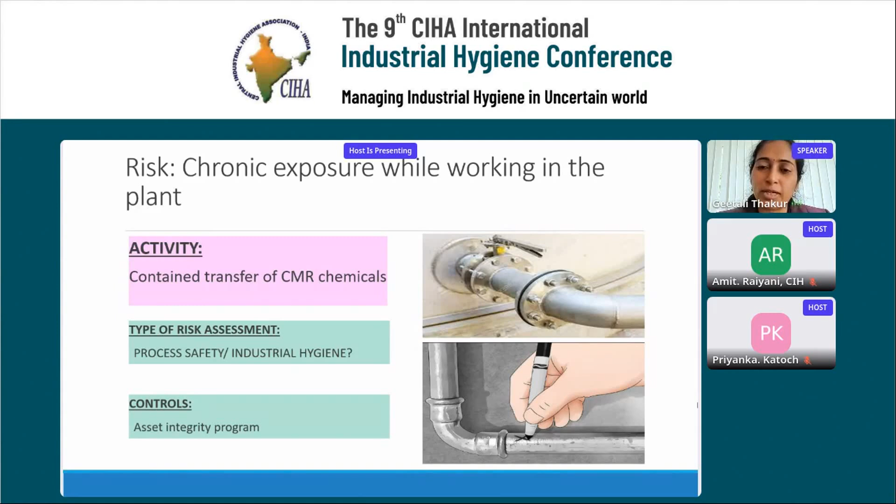And asset integrity is another element of process safety. So that's how, in fact, getting this through process safety also will actually drive the asset integrity requirement for the potent chemicals. So both assessments will be required for fugitive emissions. Let's move to the next one. Yeah, let's go next, right? Yeah, let's move to the next one.

Right, okay. So how, as an industrial hygienist, can we all help the process safety risk assessors. So the first scenario is about sampling of volatile chemicals in a warehouse.

Now, the MIE, the minimum ignition energy required by the solvent, is really around 0.2 millijoules. And the amount of static that a human being can discharge is actually around 3 millijoules. So this is a very potential case if there is open sampling happening of volatile chemicals in a warehouse.

It's something that you can bring to the notice of a process safety person, that this is a particular risk that, if you have not covered, please try to see if you have covered it, because imagine a fire occurring in that particular drum when a person is doing that sampling, and then that can lead to really a domino effect and the whole warehouse being on fire.

Now, in most of pharma, it doesn't happen that way, because we really have laminar flow booths, but in some other chemical sectors, it does happen that the sampling is done in the open in the warehouses. Also, what happens is in a lot of process safety risk assessments, warehouses are not taken as part of the HAZOP nodes and other things. So warehouse risk assessment in some places does not happen as part of process safety risk assessment as well.

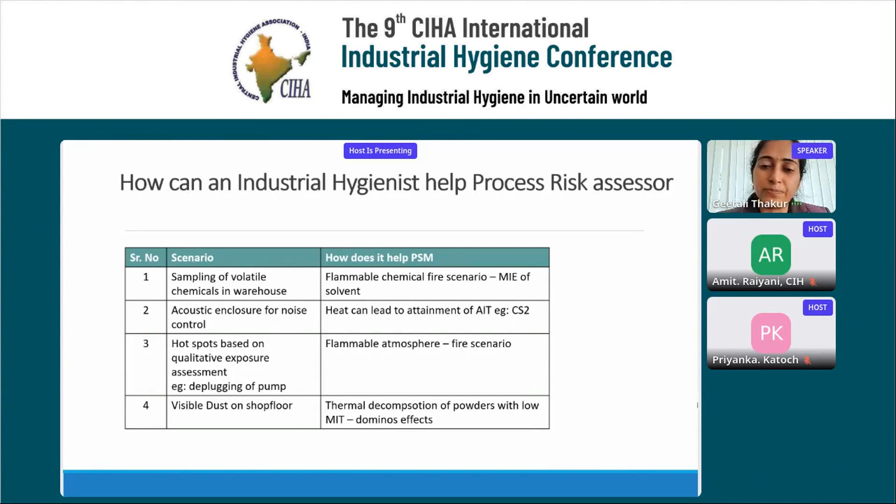We can move to the next slide.

Yeah, so with that, really enjoyed interacting with all of you, and thank you very much.

Thank you, Geetali, for such a very informative and detailed presentation. We know that industrial hygiene and process safety are correlated. Specifically, we also don't want anything material coming out from the pipeline and people getting exposed. Similarly in process safety, we don't want people or workplaces catching fire and people getting exposed. So nice. I mean, your case study was also quite interesting, comparing industrial hygiene point of view and process safety point of view.

And I'm basically from the oil and gas background, so we always have a challenge of how we can merge the 8x8 matrix of industrial hygiene with process safety. But we do the what-if analysis where we involve our industrial hygiene part also. So thanks for sharing, Geetali.

Let me see if any questions are there in the chat box. No, there was no question. Priyanka, would you like to add up something if you are there?

Yeah, Geetali, I just had one specific question. Great presentation as always. In your professional journey, what have you seen? Have you seen any kind of bias with industrial hygiene at times in comparison to process safety? Or have you always seen everything being equal, because your case studies did show some examples where scenarios where both the assessments need to be done. So we wanted, being industrial hygienists, to understand what's the culture in the industry, and what should we do to be different, or give ourselves sufficient weightage at times.

So a little bit about risk. I started this company 12 years ago now, Janet? Yes. And when I started the company, I had been in the industry already for a few years, and I wanted a focus on quality. I wanted to focus on quality of the hazard analysis, focus on quality of every element of process safety.

And the reason being is that my husband was an operator in a refinery, same refinery that I was a contractor in, same refinery that my brother-in-law was a facilitator in. And there were several incidents. My husband actually came around the corner as a fire broke out in his unit. His unit had high concentrations of H2S, had high pressure hydrogen, and a few other toxic and flammable materials.

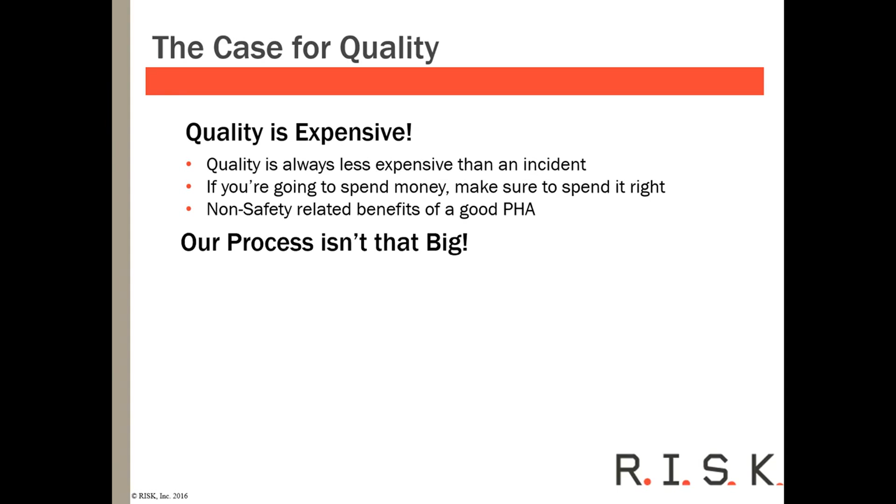I often hear our process isn't that big, right? However, when that happens, a lot of times your neighbors are right next door. I recently did a PHA where the neighbors were literally across the street from a large methanol storage tank, and it would have taken out all of the neighbors there if that methanol tank had had an incident. One bad incident can put a small operator or even a large operator out of business.

So we want to make sure that we're doing what we're supposed to have. I've also heard this one: we've never had a serious incident. Well, whenever somebody tells me that, I say, well, are you lucky? Because it can happen. Unfortunately, overconfidence does lead to complacency. Normalization of deviation is a regular occurrence in our industry. So if we want to make sure that it stays in the pipes, then we really want to take a look and make sure that we're doing it correctly.

When we're doing a PHA, when I do any kind of documentation, I'm always looking to make sure that it's understandable to the people that were not on the PHA team, because this PHA has to be done every 5 years, right? A revalidation or redo has to be looked at every 5 years according to OSHA's PSM. And if it's not understandable to the people outside of the room, then you haven't done your job well. That's just how I feel. And so the folks that work with me know that we've got to make sure of that.

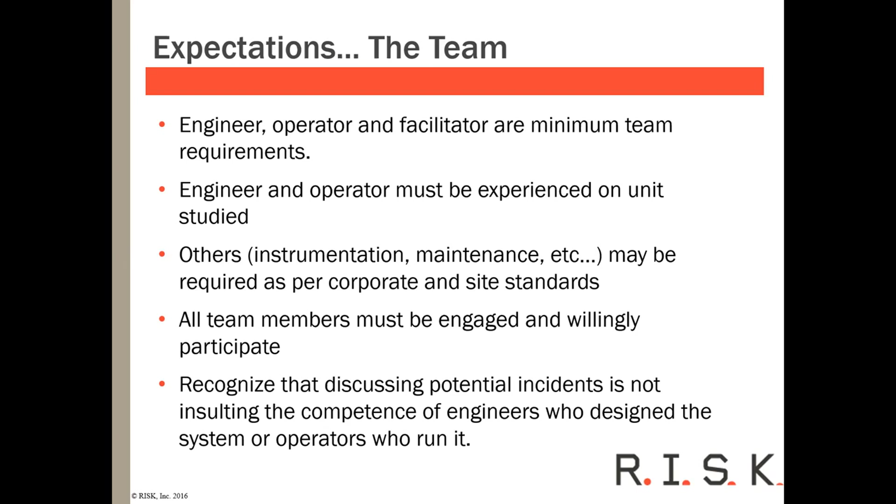So when you're dealing with a team like that, how you approach the team can really make a difference in their willingness to stay engaged in the team. Your team is really important, so work to keep them involved.

The facilitator is also important because they have to confront some of the biases that might happen. I hear a lot of times that, well, this will never happen on my unit - okay, that's a bias, right? That's a bias that it can never happen. I've also been told that everything's going to blow up and everyone's going to die. That's another type of bias.

And so there's a balancing act that has to happen here when we're working with some of the processes and dealing with people that are on one side of the equation versus somebody who's on the other side. And sometimes you have both in the room and they go head to head. So you need to understand how to address that as well.

Looking at who are the personalities on your team - you might have a team member that wants to bulldoze right over the top of everyone, so it's the facilitator's job to help manage that person, and it can be a challenge. A good facilitator, however, can handle that person and calm them down, and bring the other people that might be a little bit more reticent out, get them to speak up a little bit more. So that's part of the job of the facilitator. It's also, you want the facilitator to be able to handle some of those sidebar conversations.

I've had times in the room where I've had multiple conversations going on, and at times it's okay because of what's happening at that precise moment, but most of the time it's not. So I have to focus on making sure everybody stays engaged, come back to me right here at this point. So I work on doing that.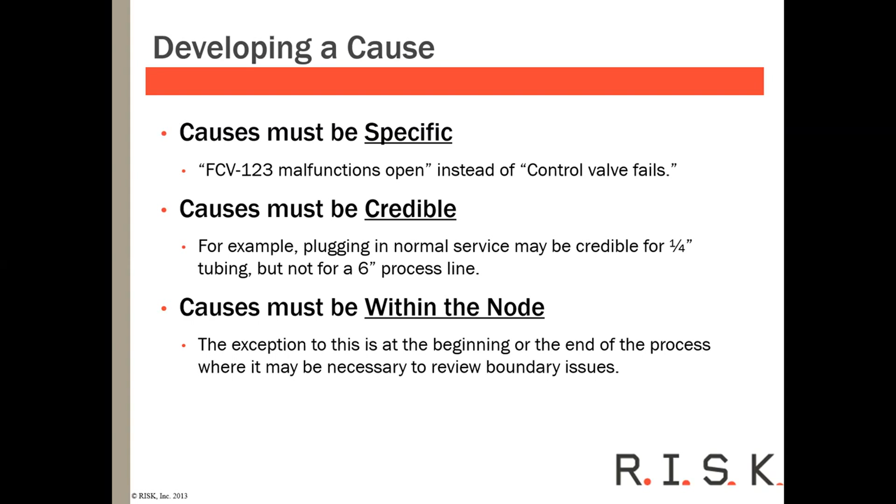This one is funny because a lot of people want to say, oh, that's double jeopardy. Really, if there are multiple independent failures that must occur for it to happen, then yes, that's double jeopardy. However, if multiple manual actions are performed together as part of the same procedure, they're not really independent of each other, so we might consider that not double jeopardy. As an example, an operator must open a manual valve on vessel A and close a manual valve on B, and he inadvertently opens the opposing one, right?

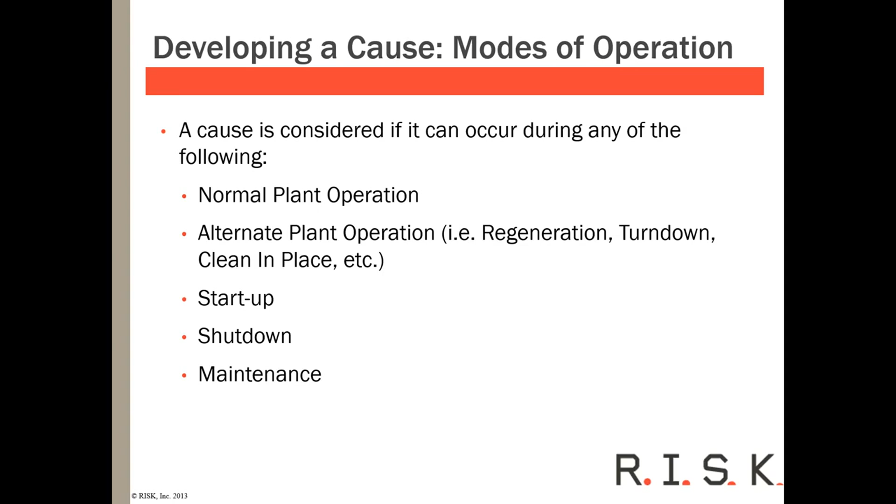Modes of operation. We really want to look at different modes of operation: normal plant operation, alternate plant operations. A lot of times a valve malfunctioning open in normal plant operation is not a problem, but during regeneration or cleaning in place, it might be - you might want that closed. Startup, shutdown, maintenance are also areas of concern. 70 to 80% of incidents, depending on who you're talking to, occur in these areas: alternate plant operation, startup, shutdown, and maintenance. So you really want to ask: do you have an alternate plant operation that you do here? Do you have a regen operation? Do you have drying? Do you have a turn down, where you go into circulation or something along those lines?

Developing a cause for different consequences. Oh, this should probably be down in the consequences. Okay, flow control - you might have different consequences for the same cause. So consequence one, you might end up with a vapor cloud explosion with flash fire, and another consequence might be a pool fire. You might separate those out, you might not, depending again.

Vapor clouds, you might have different safeguards. Again, depending on your process, a lot of times it makes sense to have two separate consequences because you might have different safeguards for the consequences. So be aware of that as well, where it's the same cause.

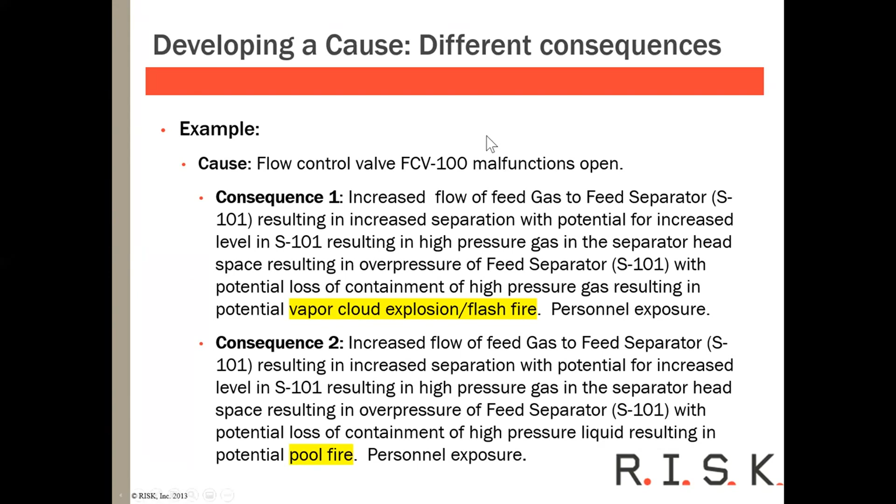Are we okay at this point? Everybody, no questions yet? Okay. So consequences - we're no good? No questions yet, we're good. Okay, good.

Okay, so consequences - this is where the story gets developed, right? In the past, it used to be kind of a laundry list. You might see a laundry list - I still see that on occasion. We want to write a story, it makes it easier to understand, only because then, for me personally and for the companies I've been working with most recently, it makes it easier to figure out where we can stop the consequence from occurring, right? So if you have a story, I can stop it here at this point, I can stop it here, or I can stop it here before it gets to that final stage.

So the consequence must be credible, developed without safeguards. This is a hard one, especially for folks that have been in the unit for a while. You want to follow consequences all the way to completion. The consequences might be downstream in another unit, right? They should be sequential, detailed, and describe the full impact. You want to consider the non-standard operating modes and look at multiple consequences from a single cause.

You must extend it to the worst plausible outcome, right? Plant trip or shutdown is not the worst plausible outcome. Plant trip is your safeguard, a shutdown is a safeguard, right? Those are things that are stopping the bad thing from happening.

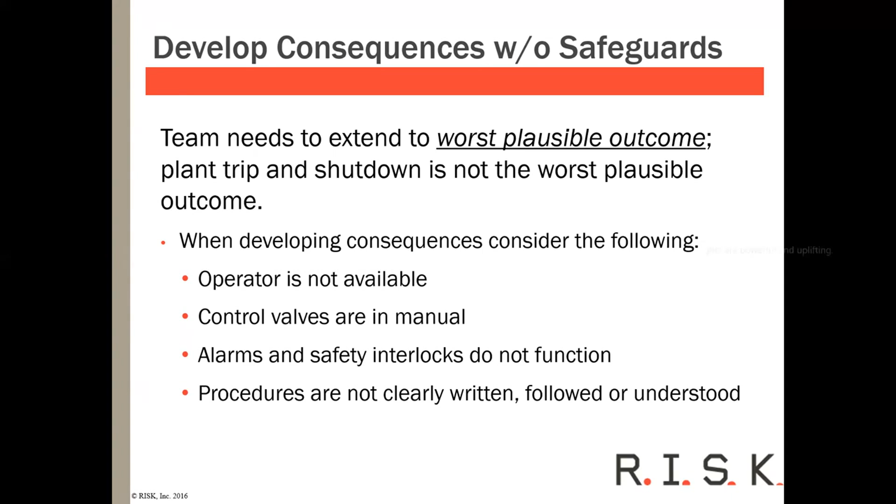So when you're developing the consequences, consider that the operator is not available - maybe he's over changing out a pump somewhere else. Control valves are in manual - you might have them in manual because you're getting ready to test something. Alarms and safety interlocks don't function properly - multiple incidents over time have occurred because of exactly that. Procedures are not clearly written, followed, or understood, right? So tribal knowledge is a real thing. Even though you might have a procedure, you might hear that it's not well written, or, well, we don't really do it that way because this is really a better way to do it. So we take that into consideration when we're developing our consequence.

A common error by a PHA team is to take credit for a safeguard when developing the consequences. I can tell you 90% of the time when I'm working with a team for the first time, that first day or two, I'm constantly saying, that's a safeguard, that's a safeguard, that's a safeguard.

So an example would be, we take it all the way to the possible loss of containment, resulting in vapor cloud, fire, explosion, boom. And so we might have personnel exposure. So here you might have somebody saying, well, we're going to have increased pressure up to a PSV lifting, or we're going to have high level in the separator leading to a plant trip. Okay, those are both safeguards.

Now, this one here, the PSV lifting, that's another can of worms I'm going to go ahead and open. If the PSV does not lift to a flare or to a safe location, there might be a secondary scenario here. So you might have fire, explosion, boom, and then your safeguard is the PSV. And then you have a second scenario that says, if the PSV lifts as expected, now we have a potential for personnel exposure to whatever the material happens to be. So now you need to see, do you have the proper safeguards in place for that exposure?

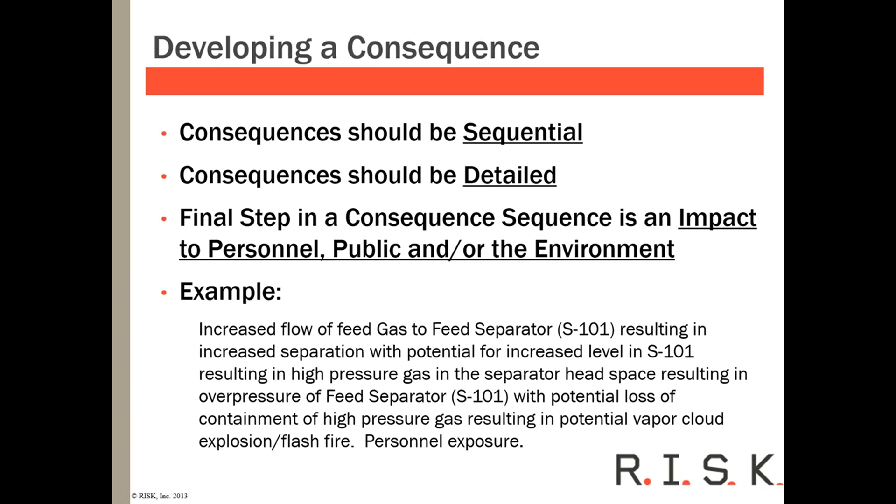So we would reduce the frequency, depending on how your risk ranking is set up, reduce your frequency by an order of magnitude. Questions?

All right, potential for multiple consequences from a single cause. Here we go, here's a question. You might have upstream and downstream consequences.

So, okay, Mohammed, I'm going to go ahead and answer your question here. Only if the PSV is lifting to an unsafe location, like lifting to where a walkway is. I actually have seen where PSVs lift and they're directed right where somebody might be walking. And that's not safe, right? Because now you have the potential for exposure and personnel, somebody's walking through that area.

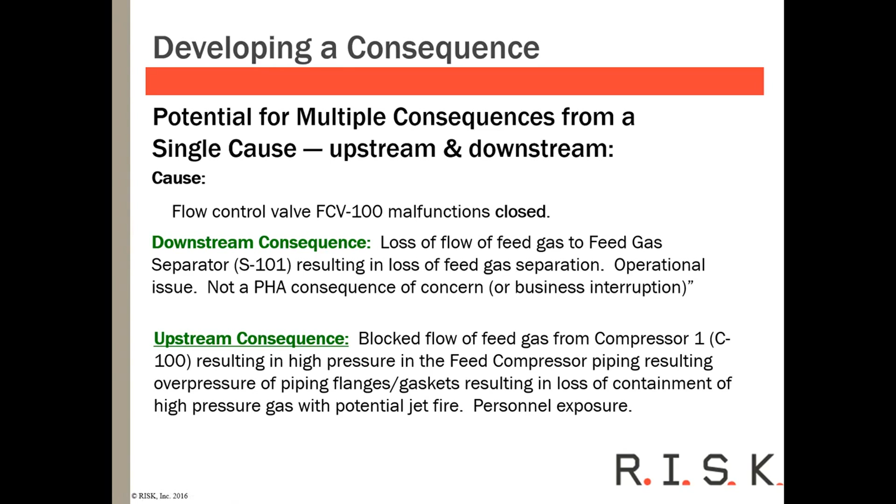If the consequence does not warrant a severity ranking, it should still be explained. The reason for that is I also do a lot of auditing, and if I'm auditing somebody's PHA and they just say there's nothing there, I'm like, well, really? Did you even talk about it? I've opened up PHAs where there's whole nodes without anything in it, but I see all these different valves and pieces of equipment, and I'm wondering, did you miss this? That makes it easy for an auditor to see that you have discussed it, and it also makes it easy for the team five years from now to see that you've discussed it.

And if you've made any changes in the process, you can say, well, it used to be safe, and now we've made some changes to the process. Is it still safe? Maybe it's not anymore. So make some kind of note. It doesn't have to be a full-blown description, but definitely put something in there that lets people know you've talked about it.

Yep, let's auditors and future teams know that you discussed the potential hazards. All right, before I move to safeguards, are there any other questions about the consequences?

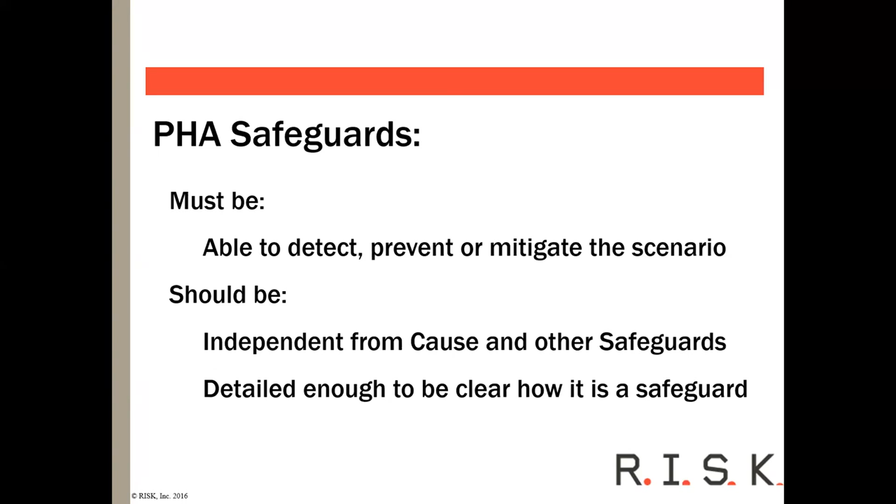It is a requirement if you're doing a LOPA, just so you're aware. You want it to be detailed enough to be clear how it's a safeguard. Just simply saying that you have a high-level alarm, okay, if that's a unit that has a lot of alarms, how is that high-level alarm going to be of value to you? Does it tell the operator what to do? So you want to know, how is it going to be a safeguard? Is it going to shut down the right thing? Is it going to protect you?

Safeguards that detect and indicate what the operator action is in order to indicate how it's a safeguard. So, PH high pressure alarm alerts operations to open the quench valve. So when we write out our safeguards, we give the information of what the operator is going to do if they get that alarm.

Safeguards that prevent are designed to prevent the scenario, and you want to make sure that it's designed to prevent this scenario and this question. So, PSV set at 150 PSIG protects separator 101, which has an MAWP of 150 PSIG. It relieves to a safe location, maybe a flare. It's sized for whatever the vapor relief scenario is. Or another one might be that you have a high pressure shutdown on the compressor to shut everything down.

So give some information to say exactly what it is. Give the tag number, say what it's protecting, say what it's sized for, say what it's doing, so that you have enough information to really know, does it protect you? The reason for this is because in the past, people would just copy and paste a whole scenario into other places and then not look to see if the safeguards would protect against that particular cause-consequence pairing.

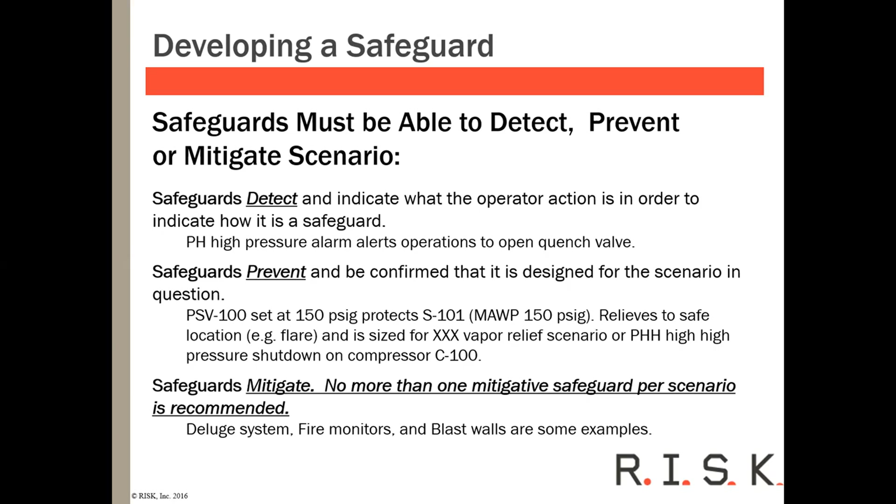Detecting something is really good because you can stop something from happening. The operator might be able to stop something from happening before you get to the bad thing. But something that's going to prevent it is going to be an automatic shutdown. So if it's really high risk, for something in the high-risk ALARP region, you want something that's going to be a preventative for sure. And again, like I said, a lot of places won't even allow you to count a mitigative, so just be aware of that.

Okay, safeguards. They really should be independent from the cause and other safeguards. The reason being, there are so many components, like for a level controller, for example, there's so many parts. A transmitter could take out your controller, take out your alarm, and maybe even impact your interlock.

So level controller will close FCV 100 on high level. That may not be sufficient because it's the same, right? That level controller malfunctions open. But if that's the malfunctioning thing, how's it going to close that FCV? It might be that transmitter that went bad, and now it's not going to close that high level, or even the alarm - you may not get the alarm because of the transmitter. So having something that's independent of the other safeguards is really, it's just better.

The level controller's failure mechanism for the safeguard is also the failure. If the level alarm is on the same instrumentation loop as the level controller, it's not independent of the failure, so it may not be sufficient. And yes, please add your response time. If you don't have enough response time for the operator to go out to the field to take care of it, then it's not a good safeguard.

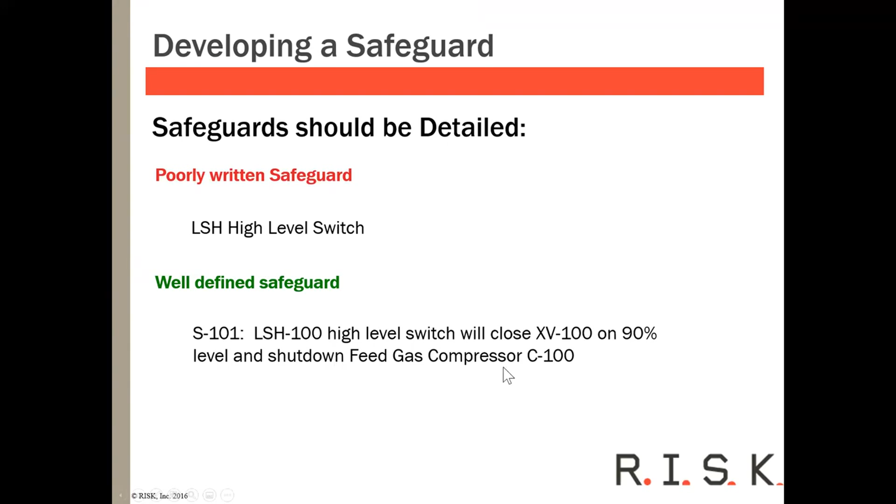But if you just say there's a high-level switch, what does that tell you? Okay, there's a high-level switch, great. So whenever somebody says, well, I have a high-level switch here, I'm like, okay nice, but what's it going to do for me? How's it going to protect the operators out in the field? Well, it's going to close the valve and shut down the feed gas compressor - that's what it's going to do. So now I know how my operators are going to be protected.

When's a safeguard not a safeguard? All right.

This one here for me is a big deal because my husband was out in the unit. We were just talking about this particular scenario just the other day.

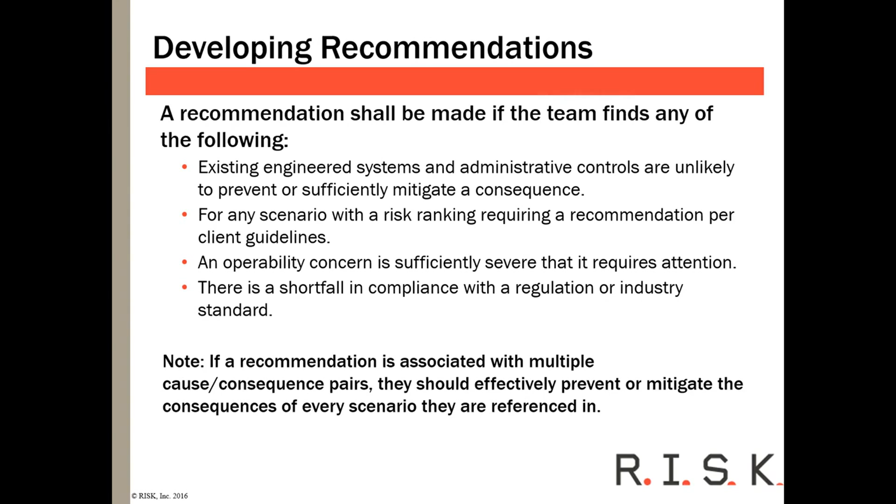It should be smart. I think at this point a lot of people know your recommendations should always be smart, but it bears always taking note of it. Specific—you want to make sure your wording gives a lot of information, right? We'll go through some examples here.

So you really want to make sure, and I really focus on making sure they're standalone, because I don't know about you guys, but I don't want to look through 700 pages to find my recommendation and where it's at. So I give enough information in my recommendations to make sure that somebody outside of that team, when they see it, is going to know what all is involved and why, okay?

Include your equipment numbers, your line numbers, your drawings that are relevant, what procedures are relevant, any relevant information, any tags, anything that you possibly can have—add that in your recommendation. You want to make sure it's measurable.

Can they accomplish this particular recommendation? I have received phone calls from clients that have said, Renee, we have this old recommendation from somewhere else, can you please help me? How am I going to close this? It's a never-ending kind of thing, a perpetual 'how do I close this?' So make sure it's something they can accomplish—there's a clear point of closure on this particular recommendation.

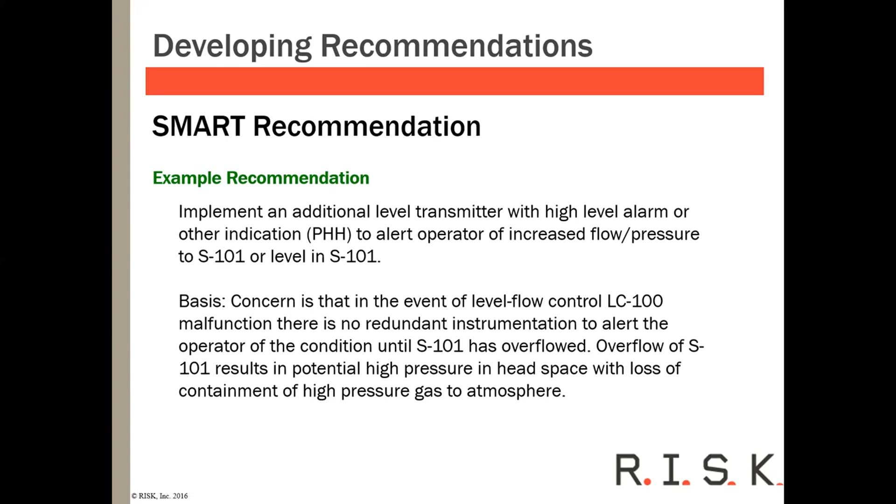If there's no risk or gap, a recommendation may not be necessary. However, there might be some process improvements, so you might keep a separate log—here are some process improvements you became aware of during your PHA. Some sites allow you to add those kinds of recommendations; more and more are not, but be aware of that in your own organization, or if you're a third party. A process improvement log is really useful.

Here's a fun one—teams like to solve problems. I don't know if any of you have been on teams, but teams like to solve problems. Many of you are engineers and you like to solve problems. So when you're in a conversation around a recommendation, there might be a couple things that are readily available, and go ahead and put that down as a 'consider.'

Consider is one of those things people don't like so much anymore, because they go, 'oh well, I considered it, so I didn't do it.' So you want to give a little bit of wiggle room, because you may not know all the answers, you may not have all the information. Be aware of that when writing your recommendation, because when the design team comes in, they might see another alternative or solution. If you have a couple of alternatives in mind, you might go ahead and write those out.